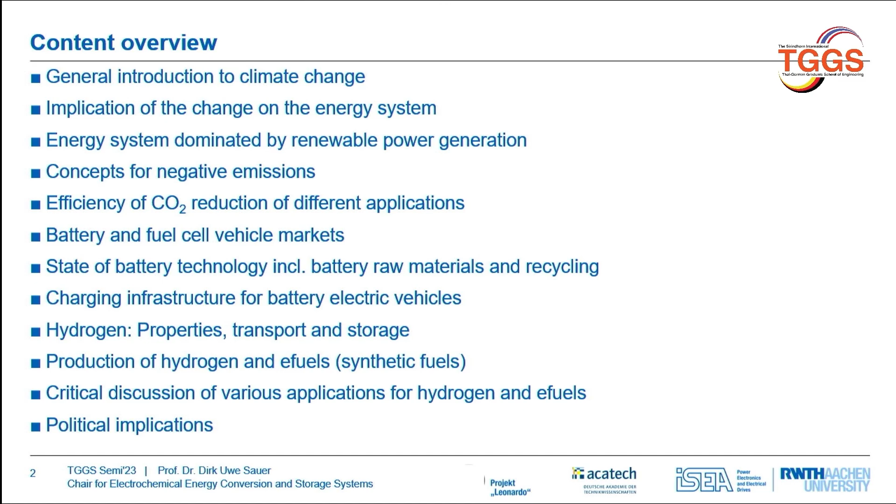So I would like to start with a short look into the general issues on climate change and the demand for lowering CO2 emissions, because this is for sure the driver for all of this. I would like to give you some insights into European and German strategies especially, and they are quite similar to the United States, though their approach is different.

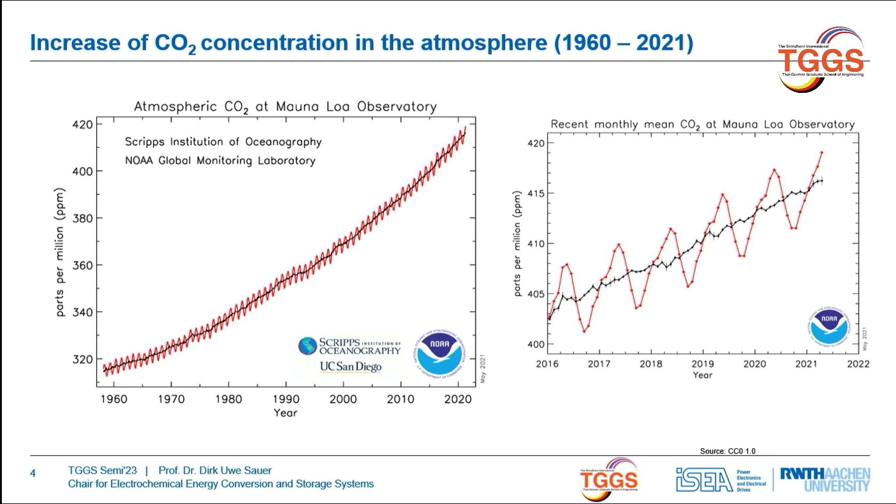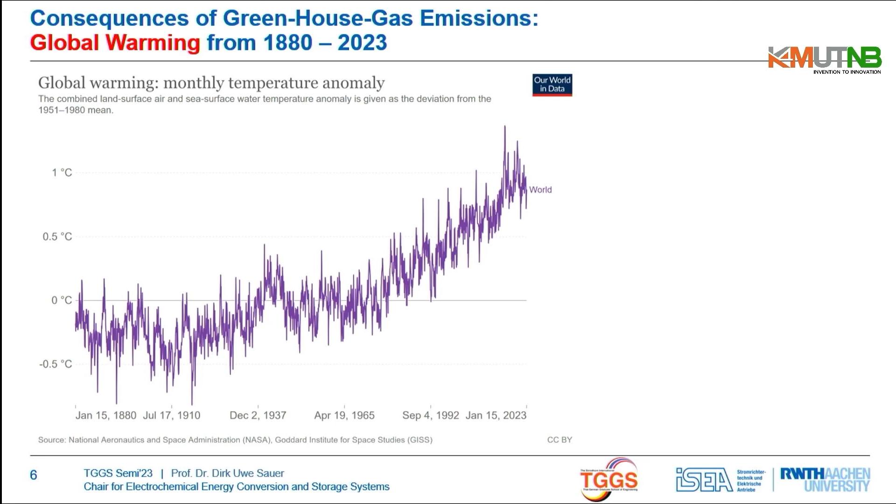Furthermore, if we look at what really happens from this, the temperature increases. We have meanwhile more than 1 degree Celsius above pre-industrialized times. It is meanwhile very clear for climate researchers that the 1.5 degree centigrade target, defined in the 2015 climate conference in Paris, cannot be met anymore. There is no way to meet the 1.5 degree target, at least not in the coming decades, maybe towards the end of the century if we go for negative emissions and more.

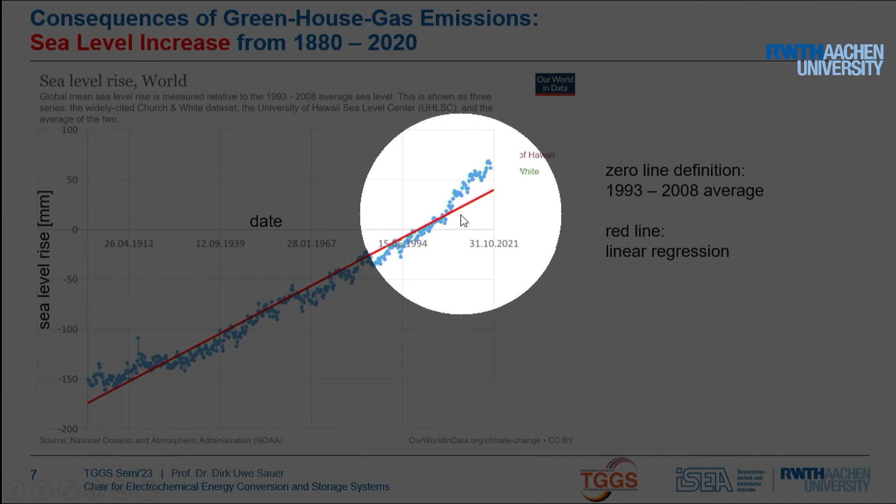But the temperature will rise, and one of the outcomes is, for example, an increase in sea level. Within the last 150 to 200 years, the sea level rose about 25 centimeters worldwide. But what is especially important is that the rate of rise increases quite significantly.

So the sea level rise accelerates. This is just one of the outcomes. All the other things: more floods around the world, more storms, less ice, and so on. This is just how it looks like.

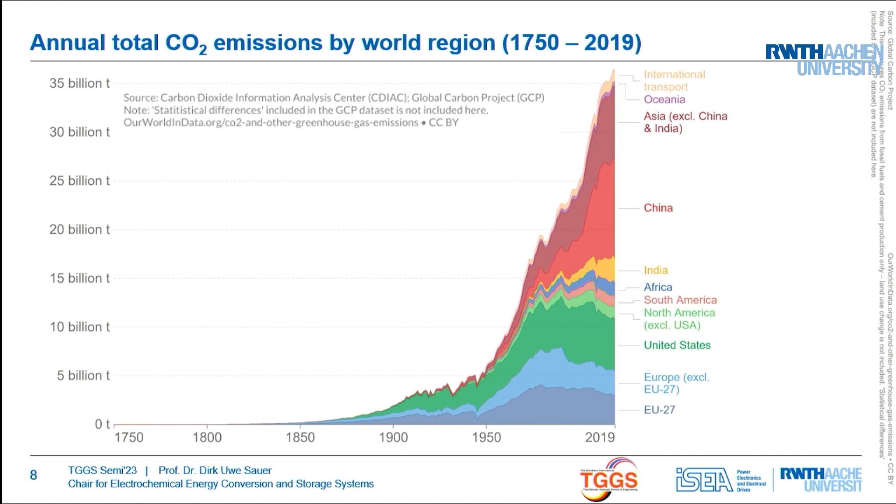Since 1990 we have had world climate conferences, but CO2 emissions still significantly increase on a worldwide level. We are probably not even at the peak right now. We hope that the peak appears before 2030, but the problems are very clear and severe, so lots of things need to be done. Some areas in the world, such as Africa or maybe even India, have just started to grow their economies significantly. If we cannot manage to transfer them right away onto a CO2-free energy supply, we'll get into even more trouble.

When we look at how these emissions are distributed worldwide, we can see that this is very unevenly distributed. We have extremely high emissions here, especially Australia and North America per capita. Europe is also among the very high emitting countries, but meanwhile the emissions per capita in China are pretty much the same as in Germany: 7.5 tons per capita of CO2 emissions in China as well as in Germany. So this has leveled in the last years, almost.

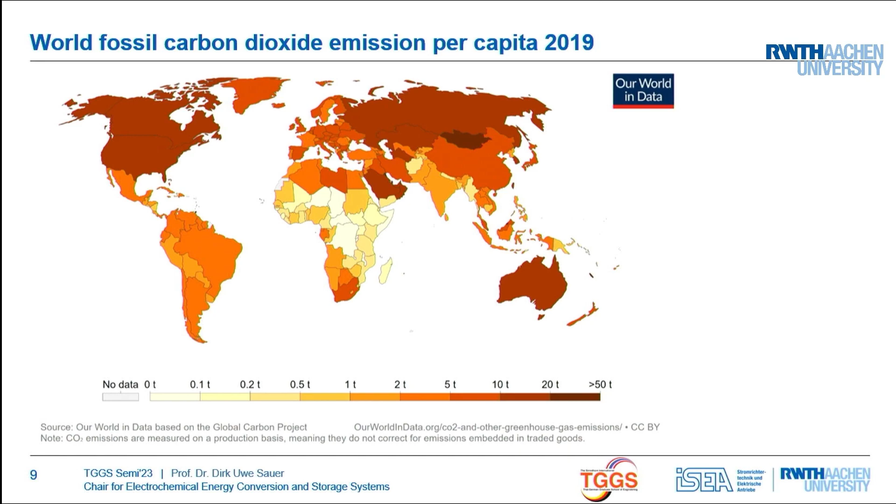So then when looking at where these emissions come from, we can have a look into the different fuels. We use different fossil fuels, and different fossil fuels have different specific CO2 emissions, no question. This is one of the reasons why many put lots of emphasis on increasing the share of natural gas. Natural gas was planned to be the technology for the transition from the old fossil economy to the future renewable-based economy.

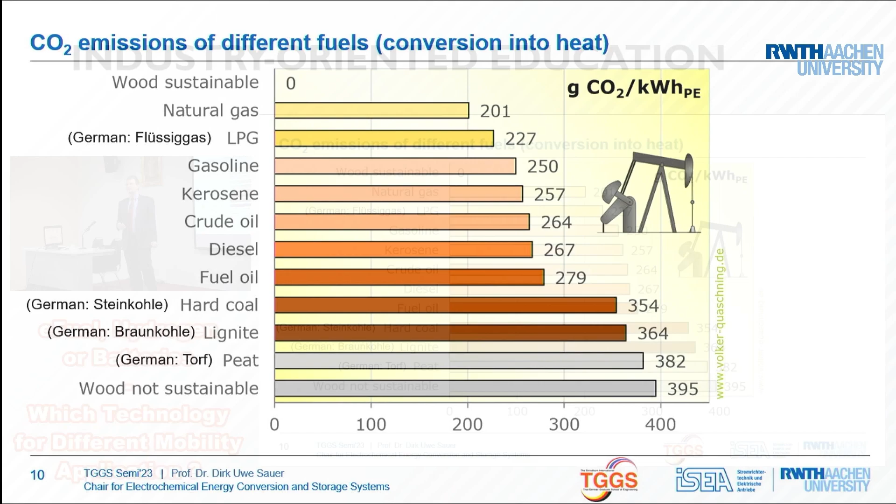But especially in Europe, we suffered a lot with regard to gas. As you all know, since tomorrow it's been a year since this war of Russia in Ukraine started. As a consequence, the European Union mainly stopped the imports of fossil fuels from Russia, and especially Germany was very much dependent on this. We imported more than 50% of our natural gas via pipelines at very low prices, we have to say, from Russia in the past. This is now over. We also do not import oil or coal anymore from Russia, and this all needs to be substituted.

This is for sure one of the main reasons why gas prices, and therefore energy prices in general, increased so much last year, because Europe bought a lot of additional LNG gas on the world markets, and by this the prices rose dramatically. Meanwhile, we're quite optimistic that we will get through the winter without major problems with gas supply, but next year will be as challenging as this year.

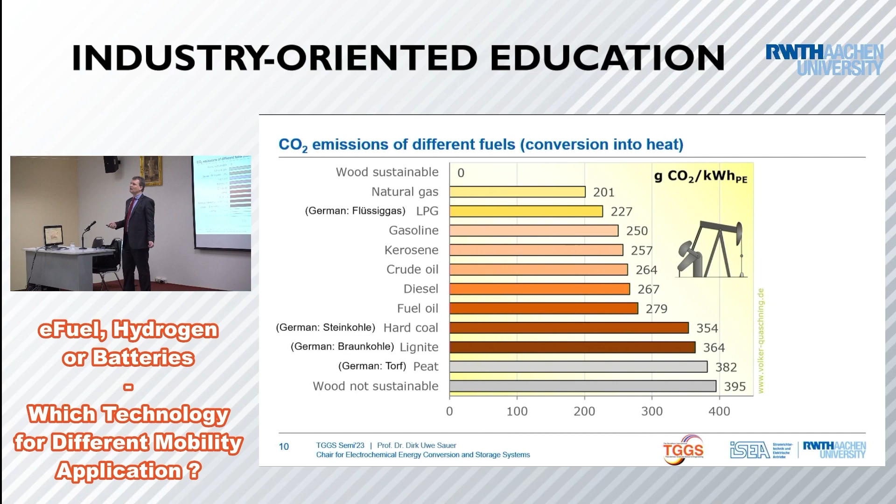Therefore, the increase in natural gas consumption as an intermediate technology is now very questionable because of the high prices. On the other hand, coal especially emits 70 to 80% more CO2 per kilowatt hour of thermal energy, and therefore gas is still a good idea, but if it's not available or very expensive, we have to look for alternatives.

One more point I would like to show here is that the question of what really contributes to climate change is very complex. This is just an example, from air travel.

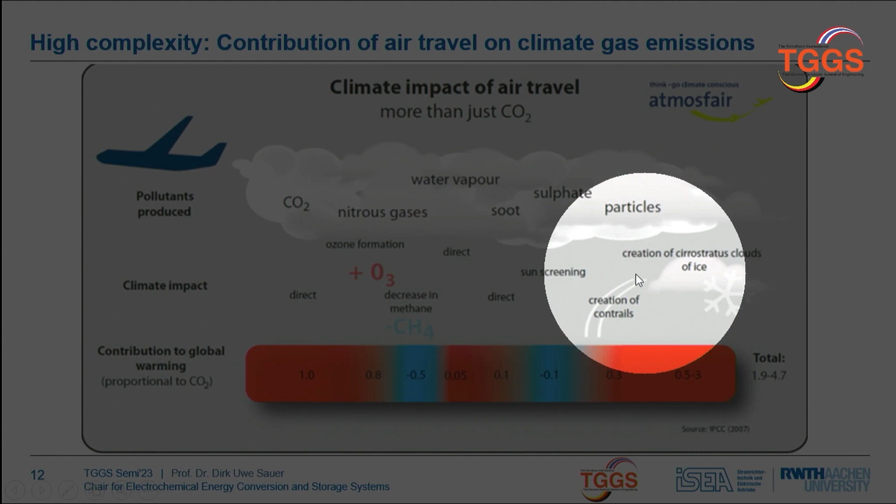Airplanes for sure emit CO2, no question. A flight from Frankfurt to Bangkok roughly emits 1 ton of CO2 per passenger. But this is not all that contributes to global warming. We have nitrous gases, water vapor, soot, sulfate particles, and many of them have additional global warming potential, while some reduce it to a certain extent. Depending on the studies you're following, the total global warming potential, with CO2 taken as 1, is somewhere between 1.9 and 4.7.

Especially water vapor is a very critical thing here. Reducing the CO2 emissions of an airplane maybe even to 0 by using, for example, biofuels or synthetic fuels, things we are talking about today, will not reduce the global warming potential of flying to 0. Because if you use hydrogen or any other fuel, it will still emit water vapor, for example. So this is not going away. The complexity of all these things is very high, and simple answers are not there.

But we have to be aware that besides what we typically have in mind, like passenger cars and power plants, the global transport sector has significant emissions, for example in shipping and aviation, about 1 gigaton per year each. Both contribute somehow like 3% each to world emissions. I'm putting emphasis on this because it is very clear that such airplanes will not fly from continent to continent on batteries, at least not within my lifetime.

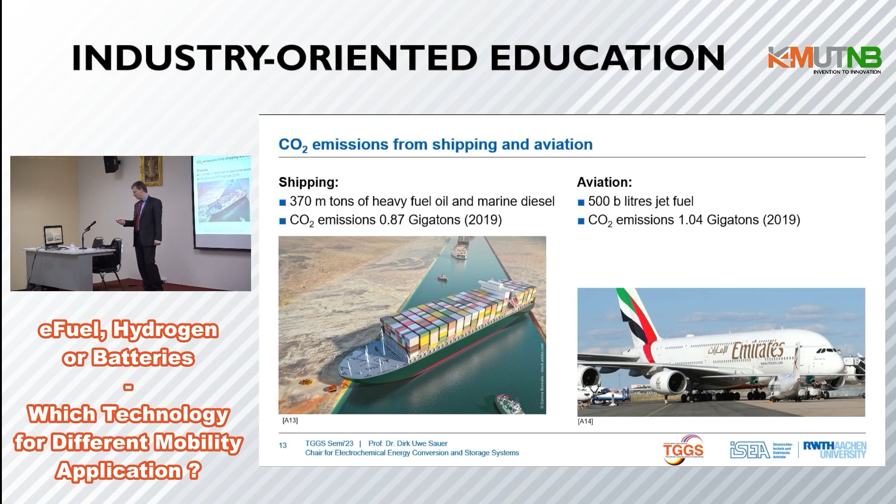Looking at the policies, we are all still following the last very important agreement from the World Climate Conference in Paris in 2015, where the 1.5 degree target was agreed on. But as I said, maybe already in 2015, but meanwhile definitely it is clear we cannot meet it. So we will go beyond 1.5 degrees C without any question. But nevertheless, based on this treaty, the European Union, for example, has set itself the goal to be CO2 neutral latest in 2050.

So it seems to be still a long time ahead, but it's just 27 years to go, so that's not a lot at all. And in Germany, also because our constitutional court pushed the politics to go even faster, we are planning for CO2 neutrality already in 2045. And especially until 2030, there should already be a reduction in CO2 emissions by 65% compared with 1990. And this is extremely challenging.

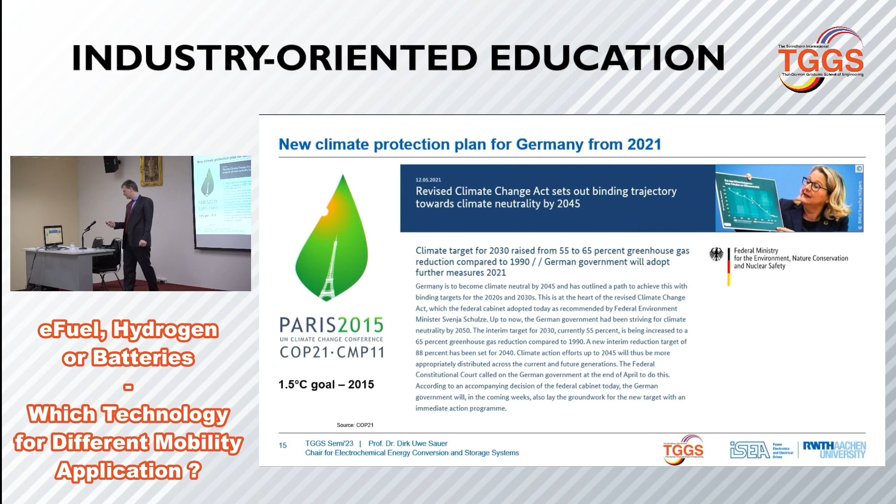And how challenging it is, you may see from this timeline. These are the CO2 emissions from Germany, starting in 1990. You can see there are reductions in emissions, and they are uneven across the different sectors. The largest contribution comes from the energy sector, because we have meanwhile almost 50% renewables there. But in the mobility sector, for example, and I will come back to this some more times, we have no progress at all, no savings in the mobility sector yet.

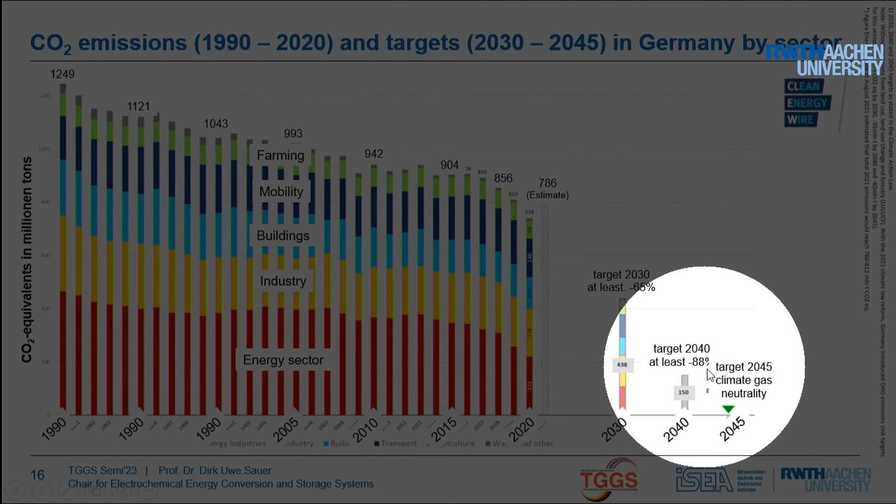But what really becomes challenging, you can see here, these are the targets: 2030, minus 65%; 2040, minus 88%; and then 2045, climate neutral, or CO2 neutrality. What this means, neutrality, I'll come back to in a minute. The challenge, for me, the biggest challenge, is not the targets in 2040 or 2045. The biggest challenge is 2030, because the time until 2030 is getting extremely short.

And we again lost more or less the last year, because our politics were very much busy solving short-term energy problems, which we faced due to this Russian war in Ukraine, and therefore time is running. So this is the most challenging thing.

We also have to be clear that even these ambitious timelines are not sufficient to meet the 1.5 degree target, and probably not sufficient to meet the 2 degree C target either, even if the whole world would follow us on this timeline.

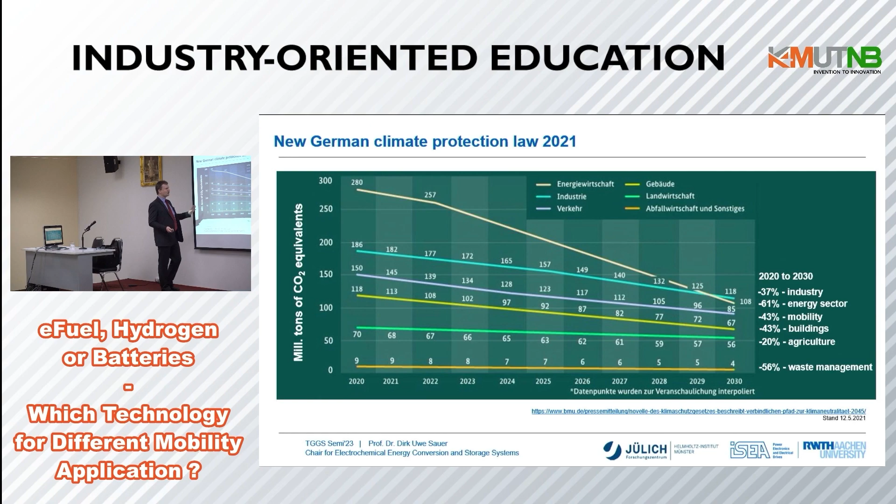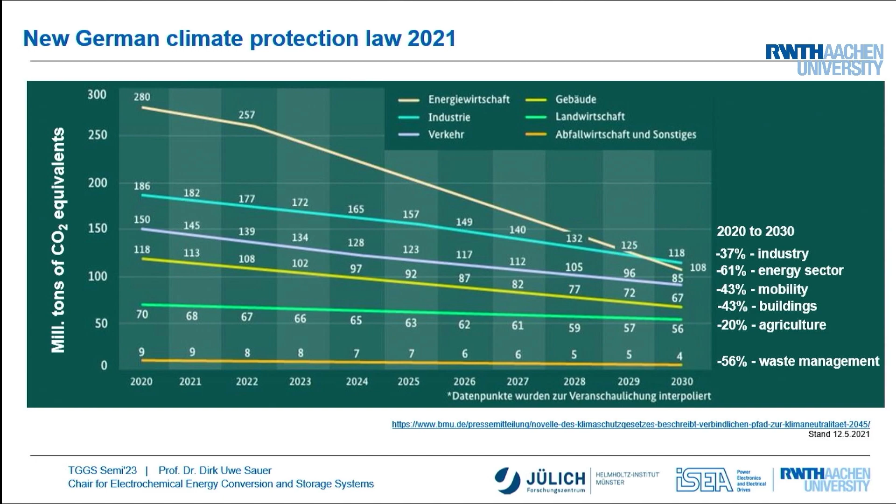It's becoming even more clear how challenging these targets are if we look to different sectors, because then it becomes more clear what it means in detail. This is the basis for our actual Climate Protection Act. From 2020 to 2030, industry should save about 37% of CO2 emissions, the energy sector more than 60%, mobility and buildings about 40%, and agriculture 20%. These are significant changes on a very short time scale.

To achieve this, the government, which came into power about 1.5 years ago, put some actions on their action plan.

The first one is to achieve electricity generation of 80% from renewables by 2030. In 2020/21 it was about 50%. So increasing this to 80%, while at the same time we expect an increase in electrical power demand.

In 2020, demand was about 545 terawatt hours, and now we expect, due to additional demand from the mobility sector, electric vehicles, heating with heat pumps, and hydrogen production, an increasing electricity demand towards 2030, and further increasing towards 2040-45, maybe to 1,000-1,100 terawatt hours. This makes it challenging in a double way.

It's not only increasing the share from 50 to 80%, but the share of 80% of a significantly increased amount of electricity. This requires a very strong initiative to increase investments in wind turbines and PV systems. Our Chancellor just said it would be necessary to build 4 to 5 new wind turbines every day in the future. This is definitely challenging.

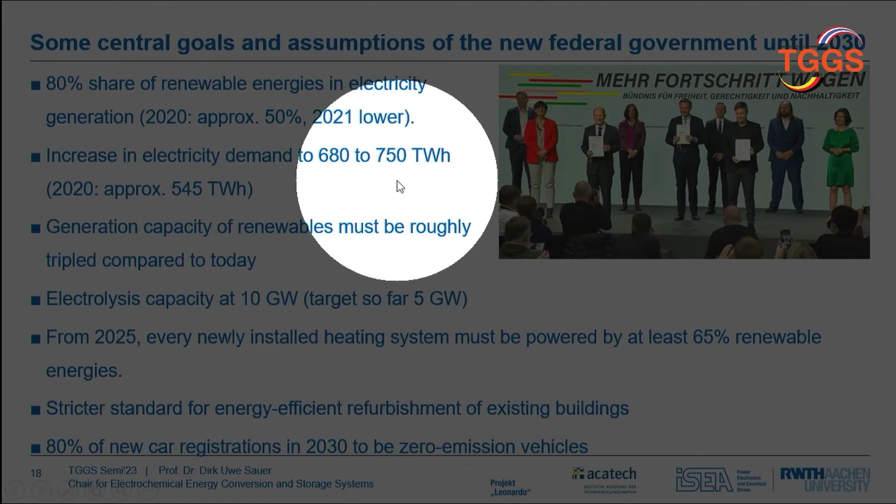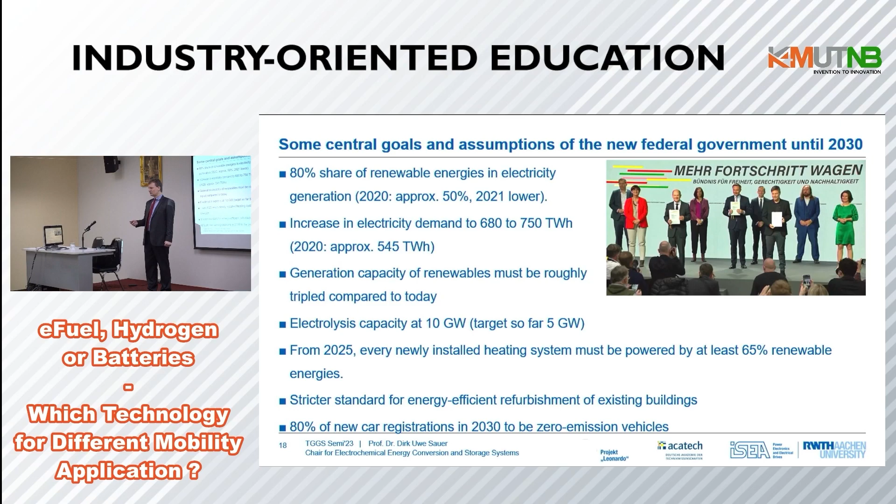By 2030, about 80% of all new cars should be zero-emission vehicles. Meanwhile, the European Union has defined a ban on all new combustion engine cars from 2035 onwards, so beyond 2035 you won't be able to sell any new combustion engine car on the European market. These are all things causing very fast changes in industries.

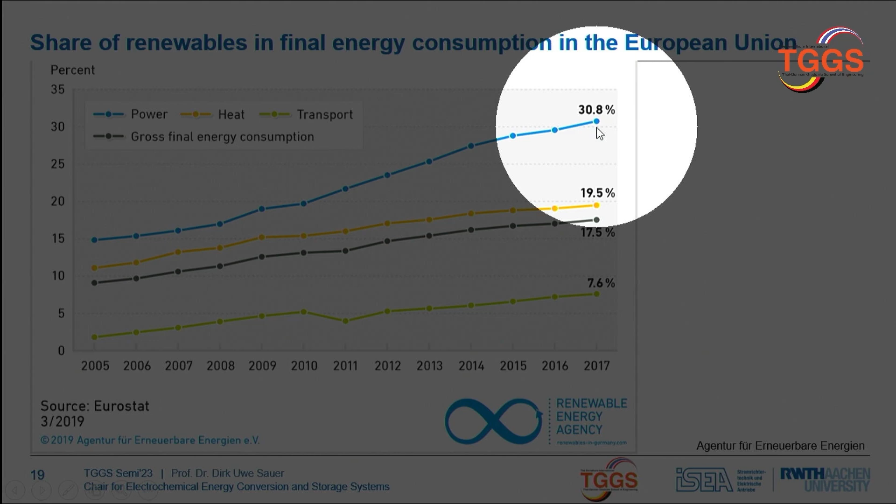If we look at the European Union in total, we can see this is still at the beginning of this major transition. The power sector in total has a renewable share of about 30% of the market, increased further since 2017, but still not too high. The electricity sector, like in Germany, is doing quite well with renewables, but other sectors like heat and transport are significantly lower and need much more change in coming years.

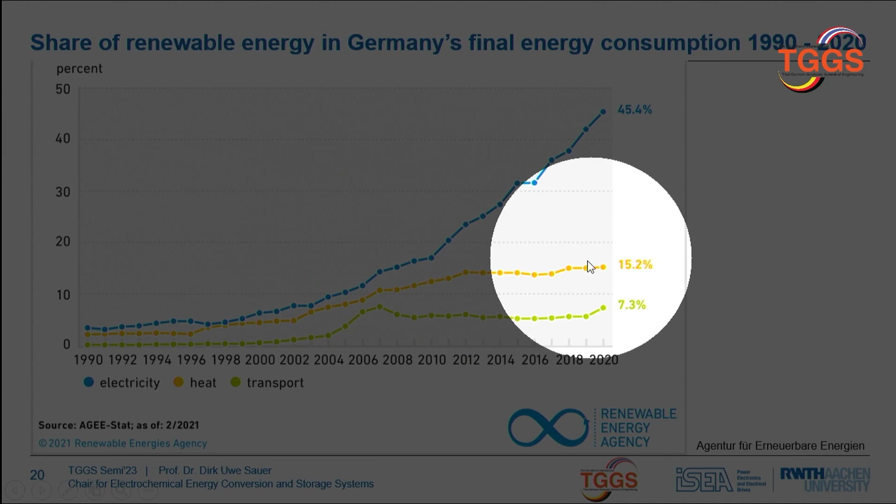These are the numbers for Germany: 45-50% in power generation, but only 7% in the transport sector and about 15% in the heat sector. The heat sector in Germany is the largest energy consuming sector because we have cold winters, so we have to do lots of heating. We lose less to air conditioning in summer, but heating is really a major concern. At this point, heating of houses takes place with more than 80% from oil or gas, direct burning in the houses, and this is most challenging here.

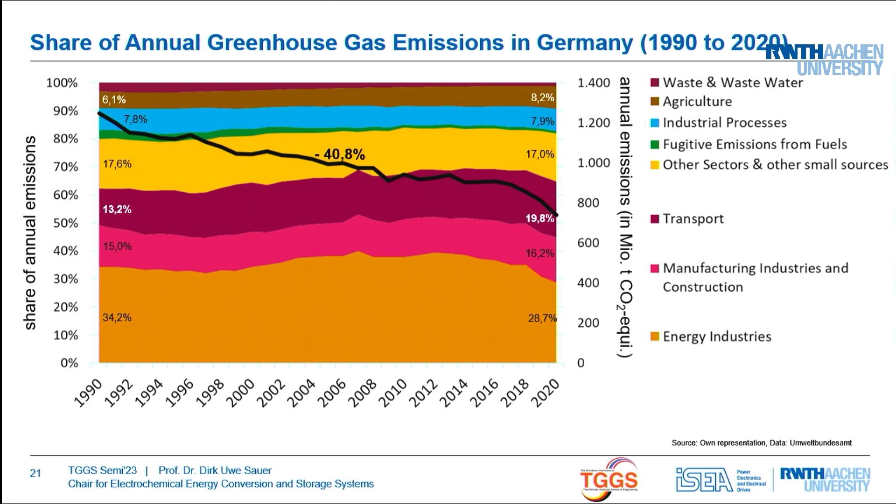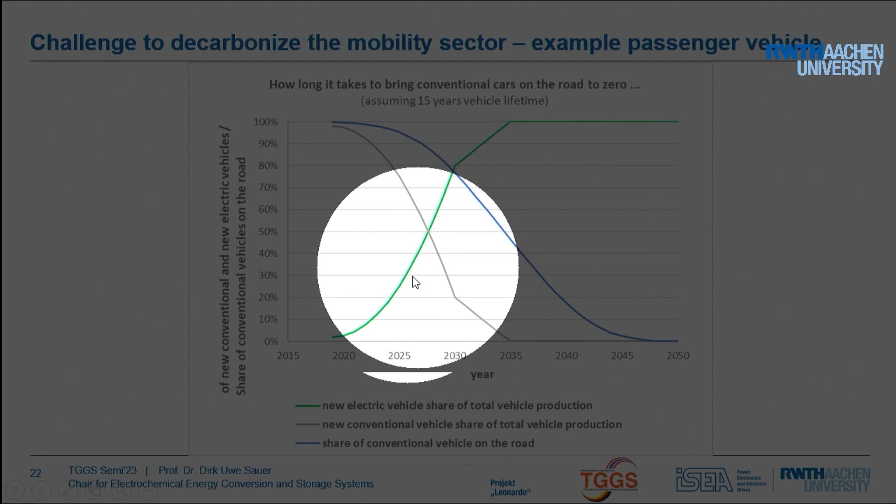To show additionally how difficult it will be to achieve these CO2 reduction targets, I made this very simple calculation. It assumes the share of newly sold passenger cars increases from a relatively small market penetration now to 80% in 2030, and latest by 2035 to 100% - this is the green curve - the share of newly sold cars which are emission-free, most probably mainly battery electric vehicles, could also be fuel cell cars, not very likely but possible.

But even then, if you look at the blue curve, this is still the stock of remaining passenger cars with combustion engines, as long as we are not taking them out of the market, taking into account a 15 year life period. So you can see that even if we achieve 80% new cars in 2030 and 100% in 2035, in 2045, when we want to achieve zero emissions, there are still conventional cars on the roads. And either you take them out of the market—probably then the government has to pay money to people because you're taking cars which are not at the end of their lifetime—or gasoline must be extremely expensive so that people more or less on their own would reject these cars. But the timescales are long, and every year, every day we lose in staying with these target lines, we will have more problems towards 2040 or 2045.

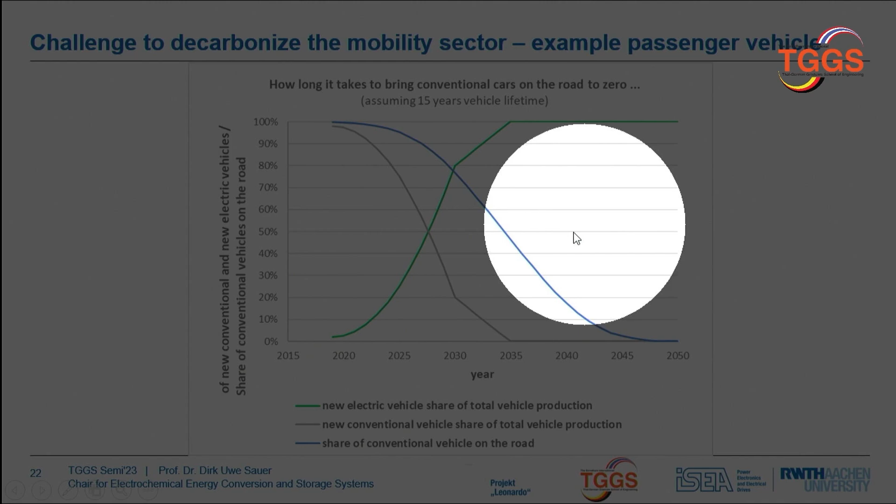We will have more problems towards 2040 or 2045. Thank you.

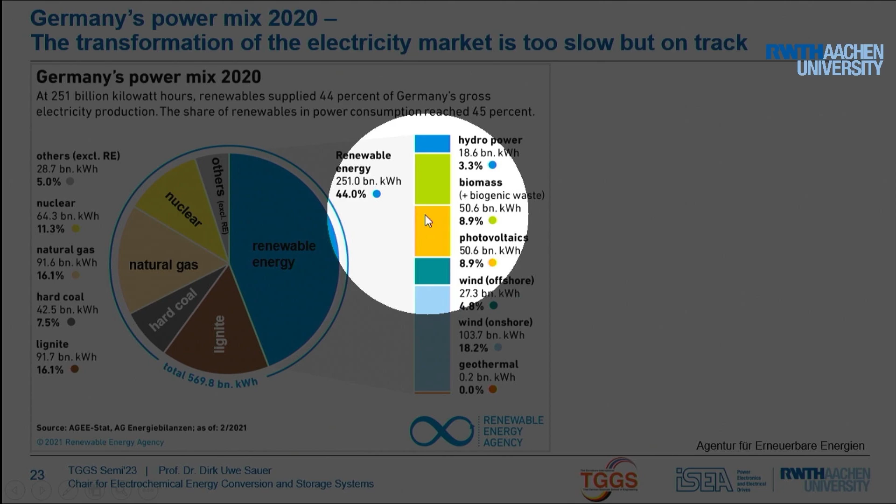You can see that the majority still comes from wind. The light blue is onshore wind turbines, the green here is offshore wind, and then we have photovoltaics and biomass. Biomass and photovoltaics for the first time were leveling in 2020. Biomass is slightly reducing, maybe more heavily reducing in the future, whereas photovoltaics is growing relatively fast.

Generally we expect the growth in photovoltaics will be larger than the growth in wind, but both are important. For the German energy system, the combination of wind and PV is important because sun is good in summertime, and wind especially is much stronger in autumn and wintertime. So we can compensate for lower solar radiation in the winter half of the year with better wind conditions—both together give a relatively good power supply throughout the year. Just putting everything on wind or on PV would cause lots of problems, because then we'd have to store lots of energy from winter to summer or summer to winter.

And these are now the targets for installation, set by the government. For sure these are just targets, because in a political system like ours, the government itself is not installing anything—they can just try to optimize the legal frameworks and maybe give some subsidies. But at the end of the day, these systems need to be built by companies.

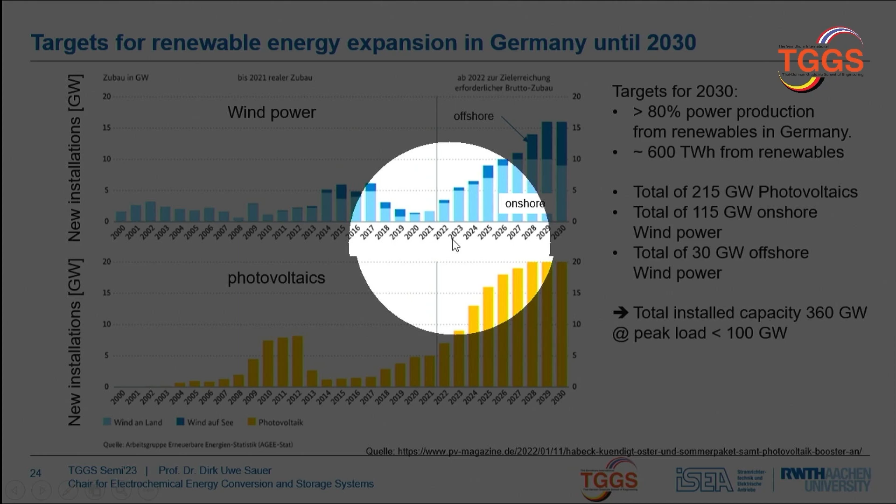You can see that latest in 2028, something like 20 gigawatts of photovoltaics should be installed year by year, plus another 15 gigawatts of wind, ramping up from quite low starting points in 2021, 2022. This is the main challenge—not only to build up or grow the industry, or to buy these things. At the moment we buy most of our photovoltaics from the Chinese market, but it's especially a problem with availability of craftsmen and sites.

It takes many years typically to develop new sites to set this up, and this is especially where our government is targeting—each city, each village should define at least 2% of their land area for renewables, to make sure we have sufficient area for this.

If all of this were installed, we would come up with a capacity in 2030 already of about 360 gigawatts of installed renewable capacity. This is worth mentioning because at the moment our peak electrical load is at 80 gigawatts. So this means in many times of the year we will have very significant surplus power generation, and this gives us room to take that surplus energy to produce hydrogen, and then in a second step e-fuels or methane or whatever.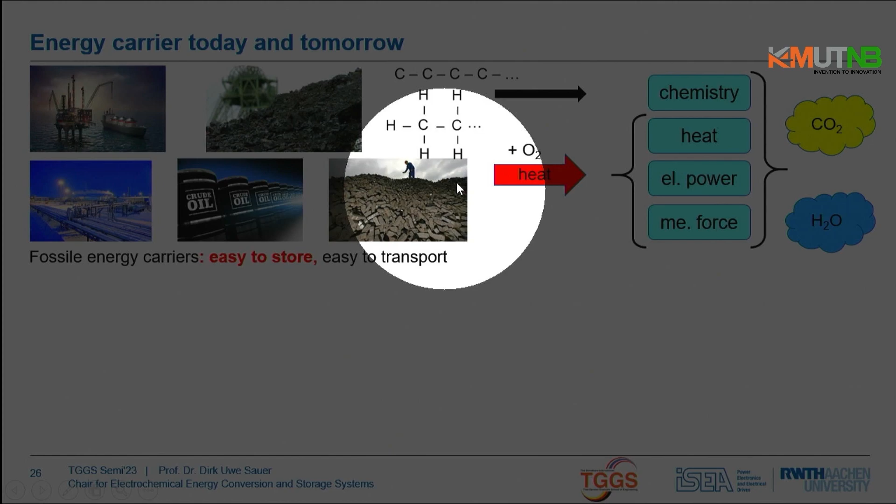Just to remind us what this really means: the change we're undergoing is that until now we're using fossil fuels, which are at the same time perfect energy storages, and the vast majority of this we simply burn. We take the oxygen from the atmosphere and burn it to make heat - heat in a combustion engine, heat in a heating system, or heat in a power plant to produce steam, or to operate a gas turbine and steam turbines. This is what we typically do. Which is quite a pity, because heat has the lowest value among the different energy carriers we have. But this is how more or less all our systems work today.

What comes is that our main source will be electricity, mainly from wind and PV systems. Some people would add nuclear power technologies - this could be discussed - anyhow, they also produce electric power. And that's important: whereas before heat is what we put into most of our processes, now it's electricity. Electricity has the highest value, because with electricity you can do everything at very high efficiency. You can drive electric motors with more than 90% efficiency. You can put it into heat pumps to generate heat with efficiencies of 300, 400, 500%. You can use it for communication, or transfer it to heat just by ohmic resistance at 100%. So electric power is extremely flexible, and this means once we have electric power, we should look carefully at which applications we can shift directly to the use of electricity.

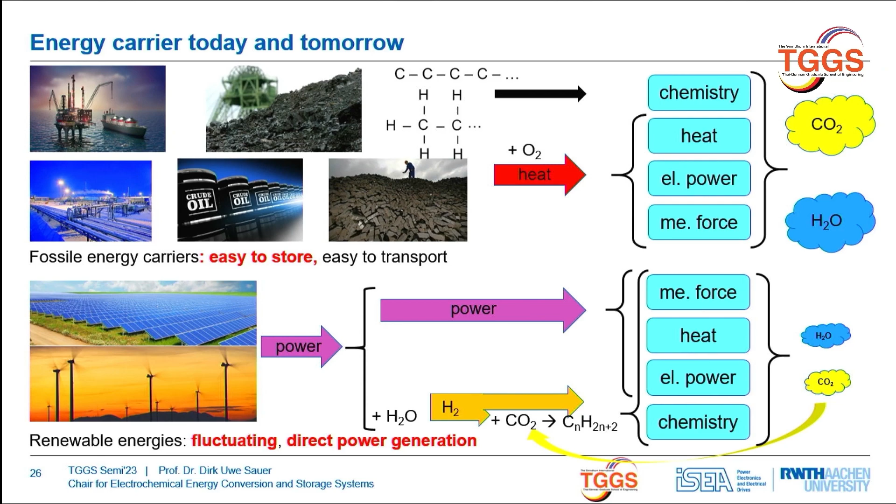But it will be absolutely necessary, and the big fight at the moment is not about the question of whether we need hydrogen, do we need e-fuels - yes, we do. The question is which sector may get some. For example, the steel industry would need huge amounts of hydrogen to convert the processes for producing steel from today's very CO2 emitting processes towards green steel. So if you want to build such new steel factories, you would need right from the beginning huge amounts of hydrogen. And the energy sector becomes more complex.

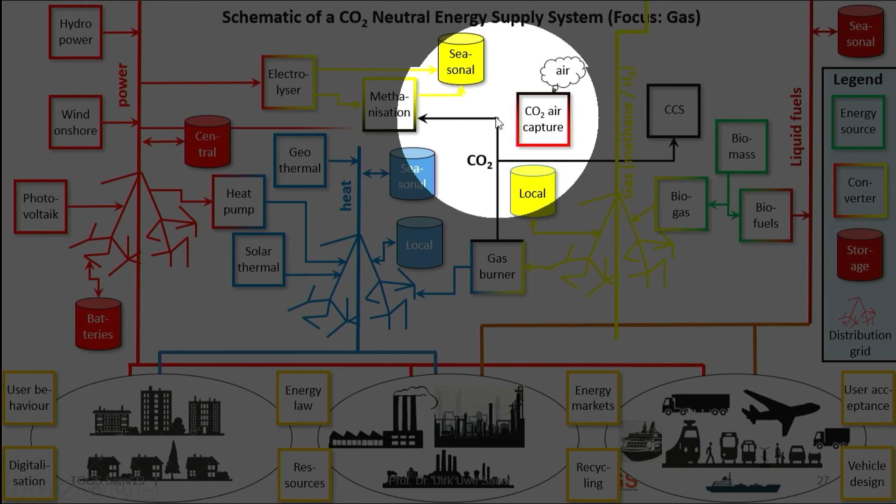So whereas in the past we had quite separated energy sectors for electricity, for gas, for heat, for fuels, and so on, we're now getting a very much interlinked system. We have power generation mainly on the side of electrical power, and from this energy goes into the heat sector, but it also goes via electrolysis into methanization, hydrogen. We have seasonal storage in gas most probably, and from the seasonal storages, we can produce electricity during winter times.

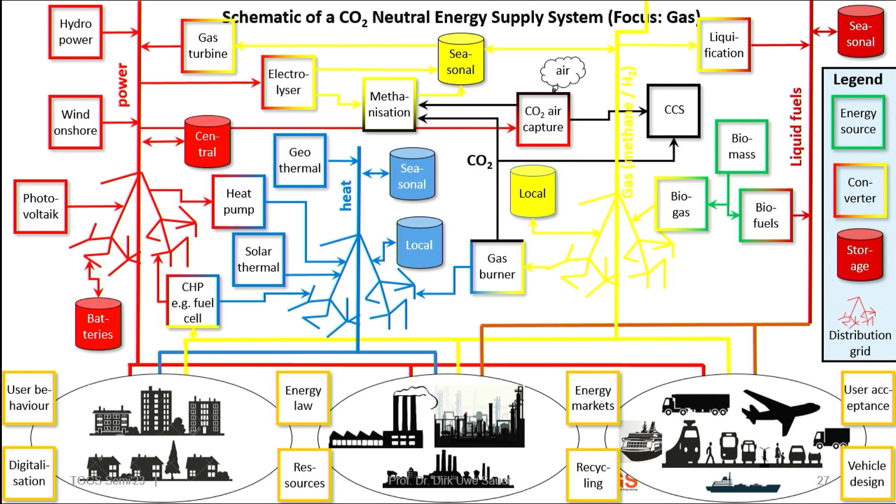All this is extremely interlinked, and this also makes this transition extremely complex, because there are very few engineers and people from economy who are familiar with all of these sectors at a time. But you must be able to think in all of these things, because one of the questions is, if there is a surplus of electrical power generation, for example, where to store it?

Will we store it directly in some electrical storage systems like batteries or pumped hydro, or will we transfer it directly to the heat sector, because maybe we need heat or cold in the winter or in the summer? Or do we produce gases and put it into the gas sector, or do we produce fuels? So all of these things are of relevance, and in addition, all of these systems are limited also by their infrastructures, by their grids. So which infrastructure should be enhanced in the future, which might be not that relevant anymore?

For example, as I said, at this point in time, we are heating about 50% of our houses with gas. This means we have a very elaborated gas distribution system where 50% of the houses are connected to a gas distribution grid. It is quite likely, from the view of this point of time, that this gas system will not be needed anymore in the future, which is a big problem for those who have invested. It's maybe stranded investment, but especially also the question, where do we invest right now?

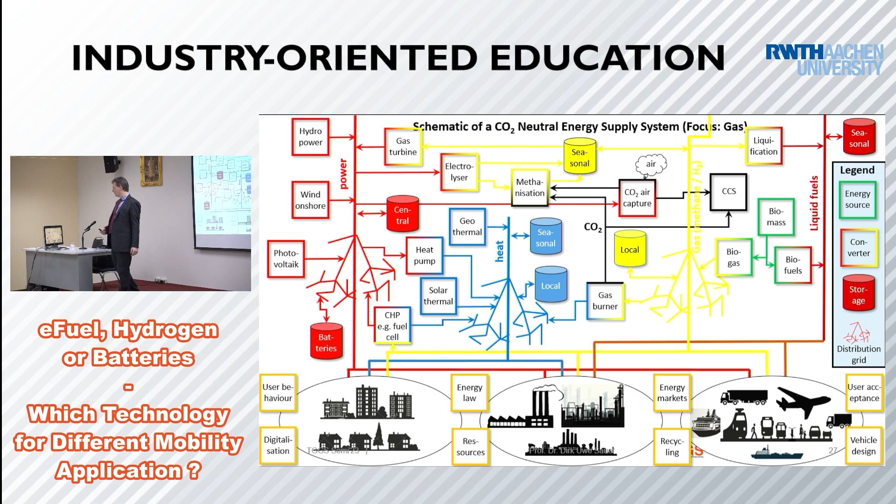So all the things have timelines of decades. So if you install an infrastructure, you would like to operate it for 30, 40, 50 years, and not only for very short times. And all this comes together with questions about digitalization, energy law, resources. So will we be limited in some of the new technologies by mining resources, for example, is one of the key questions. But also the future energy system will still rely on a worldwide trading of energy carriers.

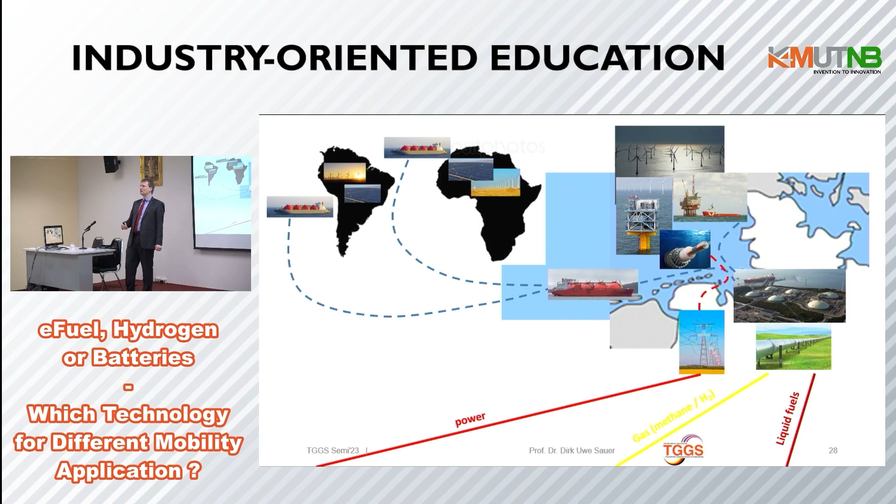Densely populated countries, especially more in the north, like Germany, like France, like Great Britain, most probably will not produce the energy they need in the future on their own area. So we will need to import either electricity via transmission lines, maybe from the southern part of Europe, gases, either by ship or by pipelines, or we will use fuels and hydrogen coming from somewhere, maybe from more sunny regions in the world, like Africa or Australia or wherever.

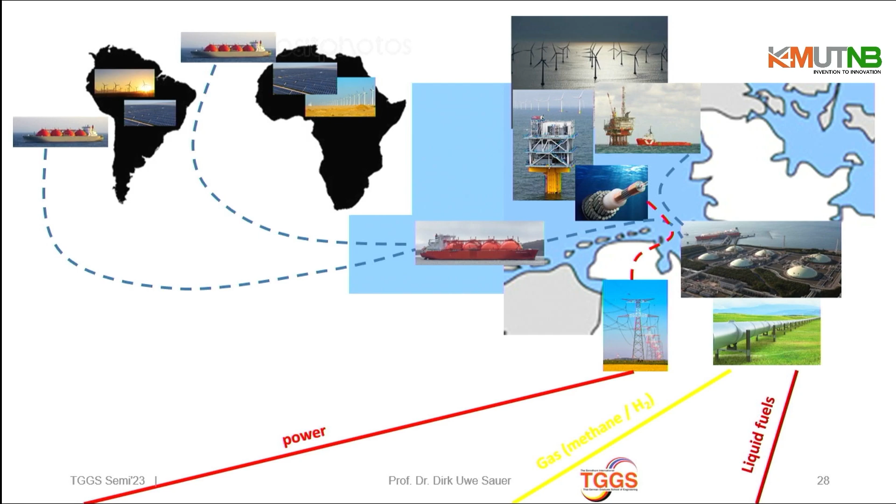These are new opportunities for those who can offer these energy carriers, but it also requires new infrastructures, new types of ships, new types of harbors, but also all the legal frameworks are not there yet. So there are no international legal frameworks, for example, for hydrogen ships and for harbors where you may bring hydrogen to.

So therefore, there are several very important areas of application in which hydrogen and its derivatives are really indispensable from today's perspective. For example, if we have wind and sun fluctuating seasonally, we need long-term storage. And this will be gas. Gas coming from hydrogen first, maybe then methane. We will remain an importing country, and probably most of the more industrialized countries will be. So we need transportability of energy over long distances.

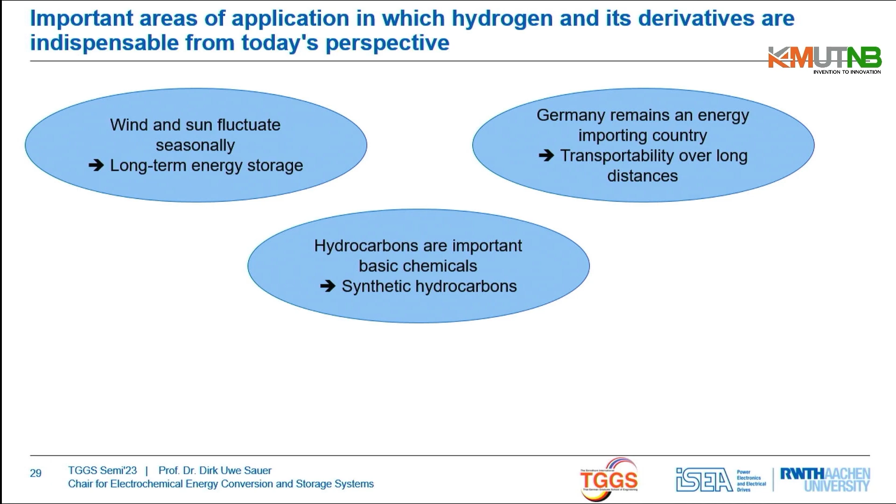We need hydrocarbons as a basis for the chemical industry. So we need synthetic hydrocarbons. The transport demand over long distances remains, probably with synthetic fuels. Not easy to transport hydrogen directly, also something we will discuss further this day. And we also will need high temperature heat, for example. Low temperature heat is easy to make with heat pumps; high temperature heat in the range of 1,000 degrees centigrade or more for some industrial processes is more difficult. And here we need, again, replacements for gas and oil based on some type of fuels.

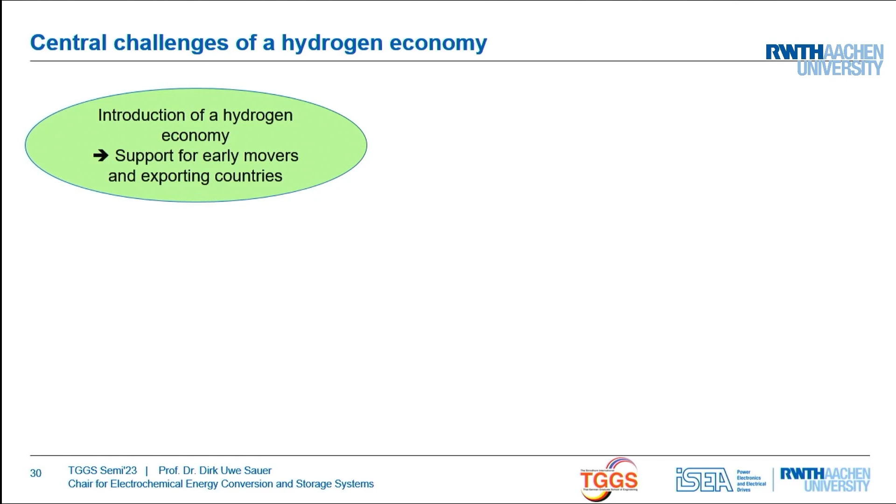And at the same point of time, building up such a hydrogen-based economy poses a lot of challenges. So the first question is how can we support first movers? Right now, one of the biggest problems is all the technologies, the renewable power generation, but also electrolyzers and the technologies to produce from hydrogen then fuels, methane, and so on, are still expensive, and they will show decreasing cost. But this means the ones who invest today pay more for their production facilities than those who will invest tomorrow or the year after, and so on.

And therefore, just from an economic perspective, there is no perfect time to do investments. Because you have the perfect market, and if somebody can produce cheaper, he simply will take the market. That's a big difficulty. So the question is, how can we support these early movers so that their investments will not be stranded if in 5 years somebody is producing the same hydrogen at half of the price, maybe.

The transport options for hydrogen and its derivatives are not yet developed in many areas. We don't have harbors which can ship liquid hydrogen or something like this. So this needs to be developed and costs a lot of time.

Then we have to face a lot of losses. We produce electricity first, but if we generate hydrogen and then maybe even further liquid fuels from this, so for replacement of oil, this costs a lot of efficiency. Therefore we have to analyze very carefully where we should take these losses into account and where it is more efficient to use this electricity maybe to save CO2 in a different place.

Let me give an example. Morocco, in the northern part of Africa, has a lot of sun, and a lot of people in Europe think Morocco would be a great country to produce, based on photovoltaics or also wind, because on the shorelines they have very good wind conditions, to produce hydrogen for the European economy. Not a bad idea, maybe even for Morocco a good business, no question. But the power supply in Morocco at this point in time relies more or less 100% on fossil fuels.

So if we produce electricity from wind and PV in Morocco, we would save much more CO2 emissions if we take this electricity and replace the existing coal, gas, and oil power plants, rather than going via a very low efficient way to use this same electricity to first produce hydrogen and maybe then some other hydrocarbons to burn later on in a passenger car. I will show you numbers on this in a minute. From an overall global climate perspective, it makes no sense.

So we should start to export hydrogen from renewables from Morocco once they have converted their fossil fuel power generation to renewable energies, not earlier than this. But business may drive different stories, while CO2 emissions are global.

At the end of the day, if we want to save the climate and reduce climate warming, we have to think globally and not about the emissions of a certain country. It would reduce Germany's emissions if we import Moroccan hydrogen, but the overall emissions would be reduced significantly more if this electricity in Morocco were used not for hydrogen, but for reducing their gas and oil power production.

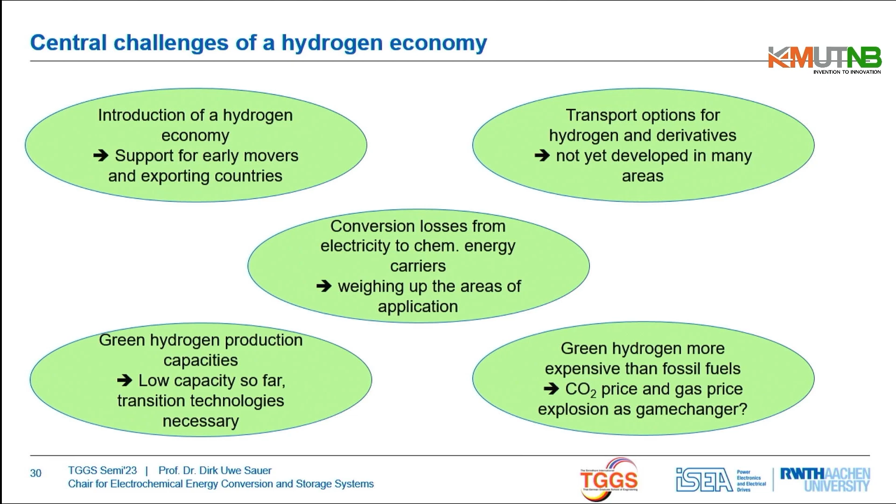Furthermore, green hydrogen is more expensive than fossil fuels. The question is, maybe the increasing gas prices are somewhat a game changer now. And the green hydrogen production capacities are still very low. I will also show you some numbers from the International Energy Agency on where we are today with electrolysis capacity and where we have to get to in the near future. So, lots of challenges, and that's what we are going to talk about here.

This brings us to the question of what it means to have an energy system which is dominated by renewable power generation.

This is how renewable power generation evolved from 1990 until 2020. You see the numbers we have seen before: wind power with the highest share, biomass and photovoltaics quite equal. Geothermal energy does not really play a role, and Germany has a very limited potential for hydropower, just about 3 to 4%, with not much potential to increase this. This is for sure different in other countries of the world, but this is as it is.

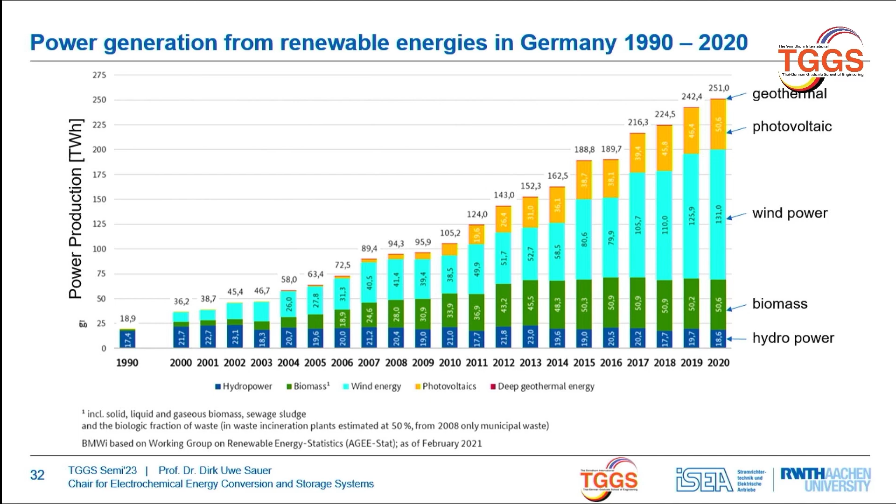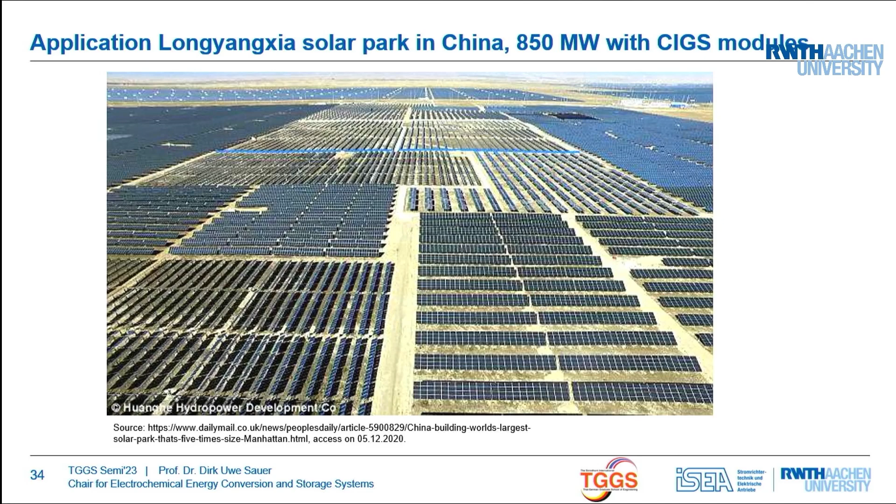Why does this happen? Simply, luckily, renewable power generation is meanwhile the cheapest way to produce electricity among all the alternatives—by far cheaper than gas, cheaper in most countries than coal, and by far cheaper than power production from new nuclear power plants. So this is good news.

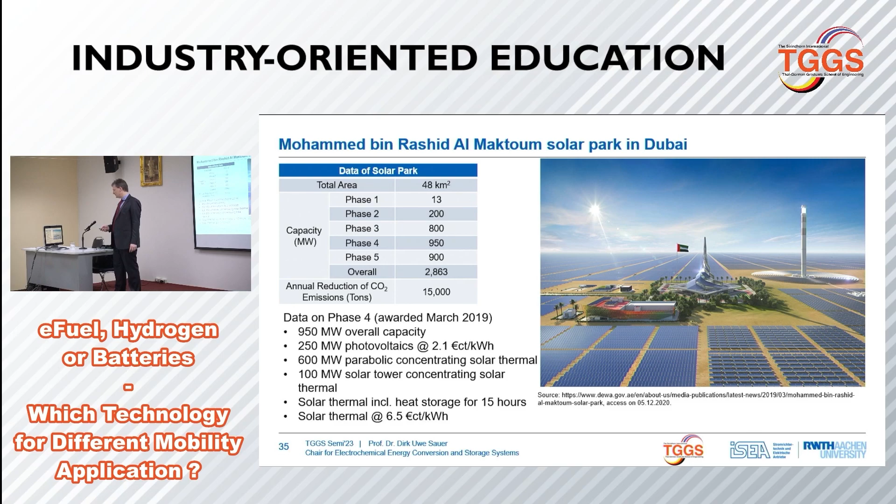This is more or less what we achieved in the last 20 to 30 years, developing new technologies which are now in place. Wherever decisions are really made based on pure economics, renewables are in the forefront, so we must not convince people anymore about the technology. This is mainly due, as I said, to the reduced prices, and we know there's an economy of scale depending on the overall amount of installed capacity.

The pity is the vast majority of production capacities are concentrated in China. That's not a problem on its own, but it's a pity that we do not have a more widespread technology all over the world, because we would need even more capacity than what we get today. That's maybe something which has to develop again in the near future.

This is important for all the discussions, because there are still a lot of people who always say renewables make our energy system expensive. And this is not the case. These are numbers from the German energy market, from the first part of 2020, January to mid-September.

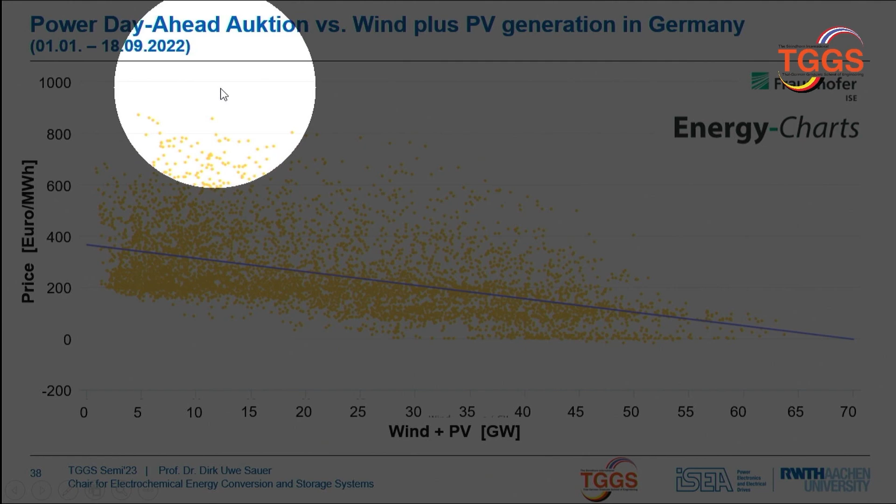Each of these yellow dots is a price from the German power exchange. Every hour, a price is set on the power exchange, and it is plotted versus the actual feed-in of renewables, wind and PV. For example, here we have 25 gigawatts of wind and PV fed into the grid.

We can clearly see that the price at the power exchange decreases with increasing share of power generation from renewables, and the trend line here is very clear. We are most expensive when we have to rely completely on fossil fuels, and with high penetration of renewables we are getting cheaper.

This is important, especially from a psychological point of view, because people have to understand: renewables is not the enemy of a cheap energy system. It's the friend of a cheap energy system, and more or less the only solution.

This is especially true in Europe because we've had a CO2 trading mechanism for maybe 15 years. For a long while it didn't really work because the price was very low, so it didn't have any impact. But in the last two years, many people have overlooked this - due to all the Russian politics, even before the war began, energy prices increased quite a bit.

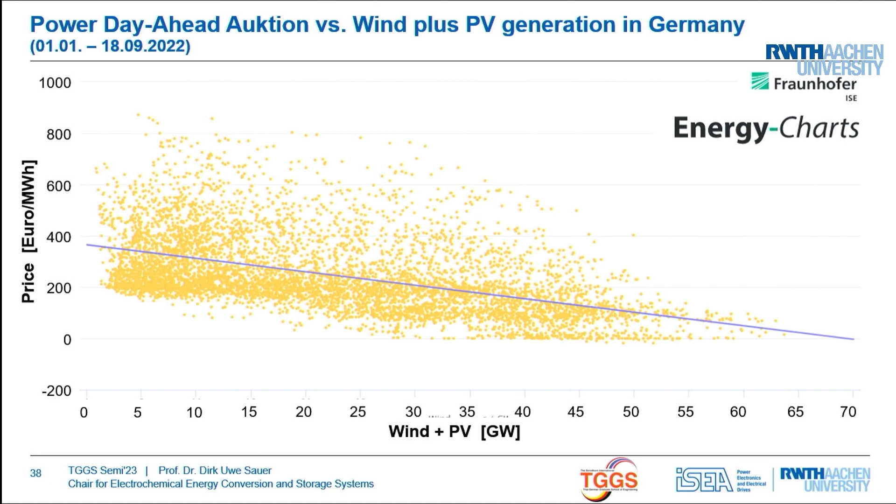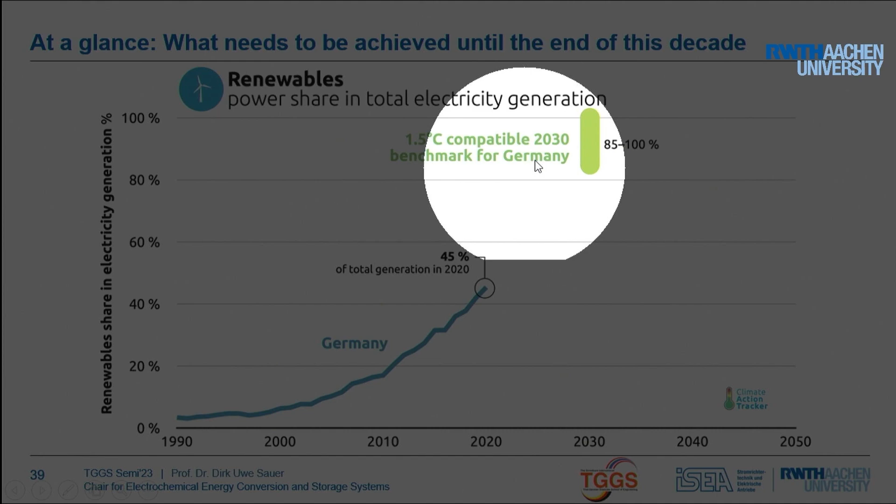But nevertheless, as I've mentioned, we still have to go significantly further to be compatible with the 1.5 degrees C target. And just to be clear, the capacities in renewables are not really limited, even though a country like Germany and others will still remain to import energy carriers in the future. We would be able to do it also in Germany.

I'd like to show you a very simple calculation about this, because we already use significant shares of our land for growing crops for bioenergy - as biofuels, 5 to 10% in our gasoline, and for power generation. In total we use about 2 million hectares of land in Germany continuously for growing crops for bioenergy, out of about 16 million hectares of land for farming.

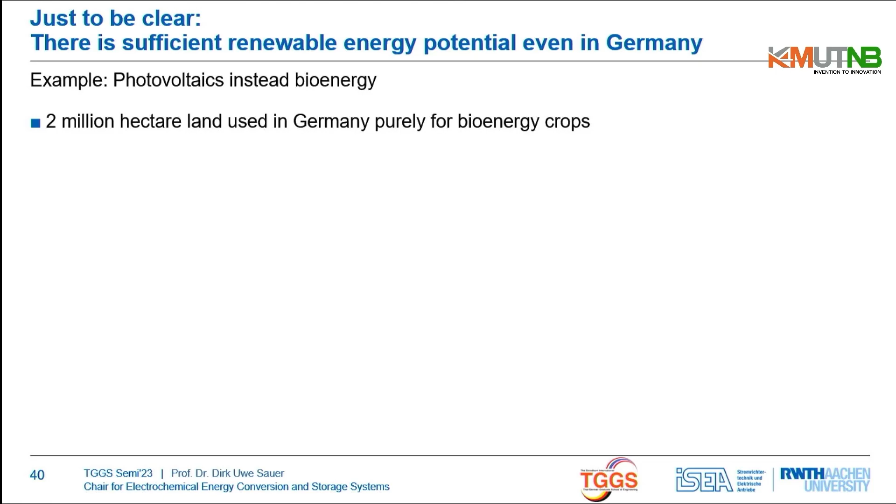Now, if you make some assumptions about the use factor of photovoltaics, the efficiency of PV systems including losses, and the solar radiation as we have it in Germany, we can calculate that if we converted this land - instead of growing crops for energy purposes, putting PV systems on the same land - we could easily produce more than 1,000 terawatt hours of electricity. Today we use 550 terawatt hours of electricity in Germany, so we could produce double on the same amount of land, and that's quite significant.

The main reason is the conversion factor of plants from solar radiation to energy is in the order of 1%. And PV does it with 20%. So from the same land, we can get 20 times more or even more energy.

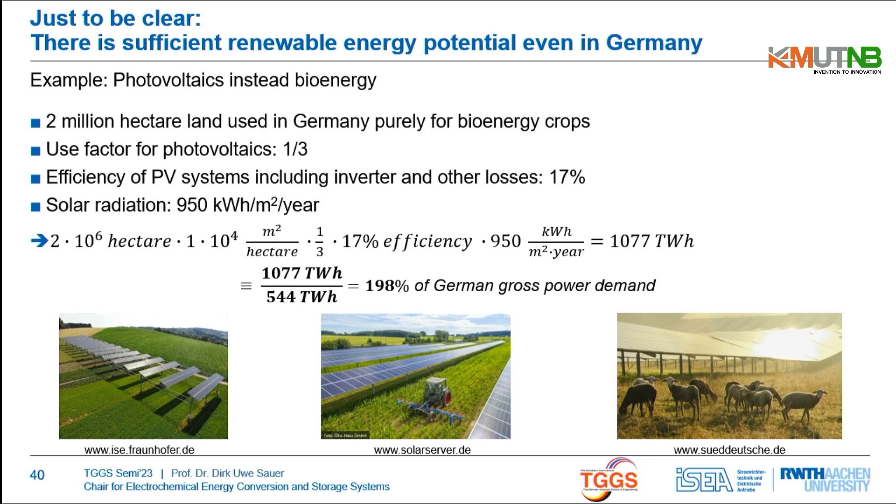And by the way, we also would do something good for the environment, because growing these crops needs a lot of fertilizers and pesticides and so on. And if we would grow PV instead, we could leave the land around relatively untouched, and it would be a good habitat for insects, birds and other animals. So it would be good for all of us as well.

But there are also ideas to combine both farming and PV. This is what they call agro-photovoltaics, putting the PV on small towers, maybe 4 or 5 meters high, so that you can still grow crops below this. Some crops even grow better if they get some more shadow. Some may have a reduction in production of maybe 10 to 20% due to the shadowing, but this is also an option.

So I just want to show with this, we are not suffering from area. We're not having a problem with land. We just have to do it, at the end of the day.

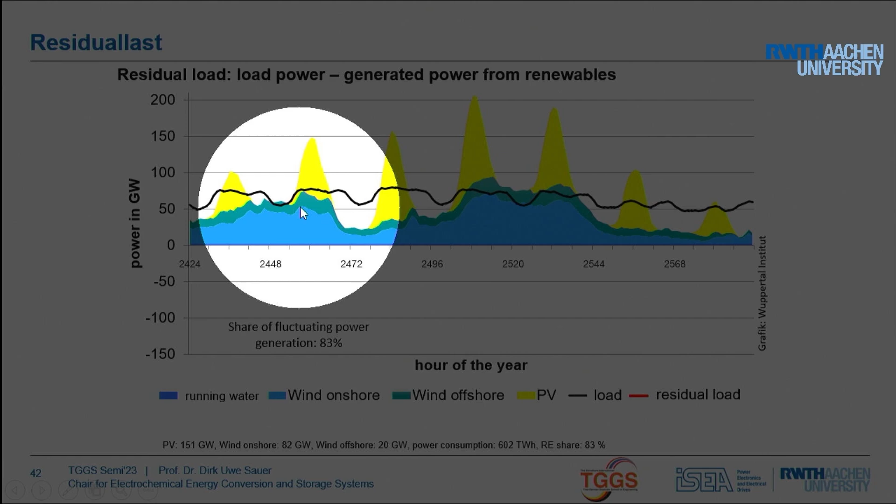Assuming that it is more or less the same as today, about 80 gigawatt in peak. You can see here the day times and the night times, and you can see Saturday and Sunday with a somewhat reduced power demand.

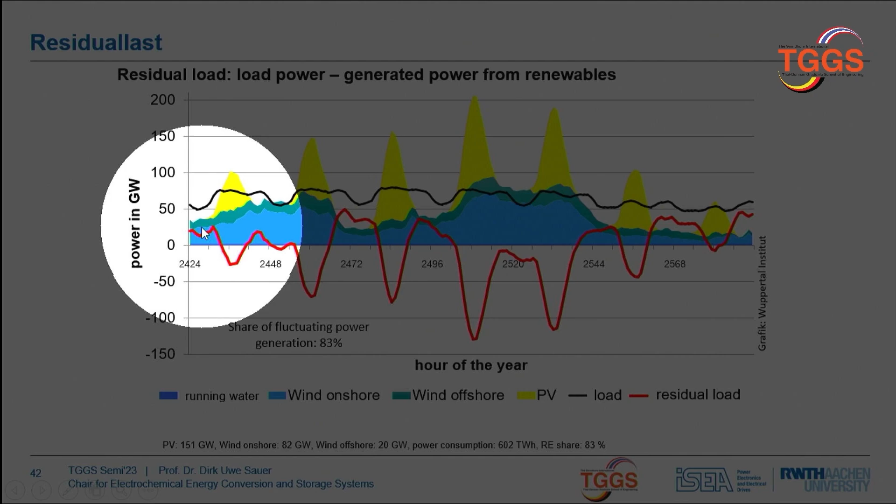And from this we get what we call the residual load curve. The residual load curve is the load, shown here as the black curve, minus the power generation from renewables. This means whenever the residual load is positive, we are lacking power generation.

So we have to add power from storage systems, for example, or we have to reduce the power consumption, with more flexibility, for example reducing charging of electric vehicles, or use in industry, or whatever.

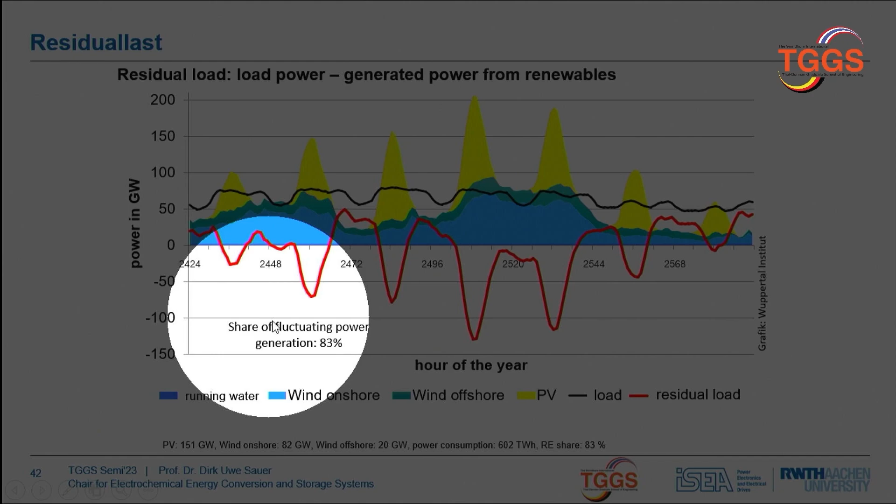And whenever we have negative residual load, it means we have surplus energy. So this is what we can put into storage systems, what we can put into hydrogen production, and then furthermore into fuels and so on.

So negative residual loads are easy to handle, this is not really a challenge. Positive residual loads are a challenge, because if we cannot manage to balance the loads and the production in any second, then we will have trouble, and the electrical system will break down.

But these are the challenges we have to deal with, and this is why we need much more technologies for flexibility, which can deal with this. So this is a major change.

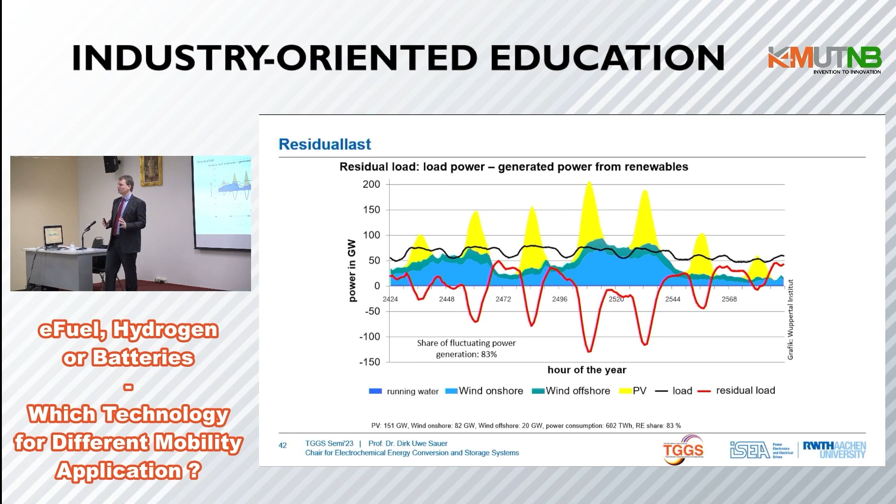In the past, we simply adapted power generation mainly from conventional power plants according to the load curve. So we always followed the load curve with our conventional power plants, because they have the energy storage included in the fuels. This is a really great thing about fossil fuels, they are perfect energy storage systems. No question about this.

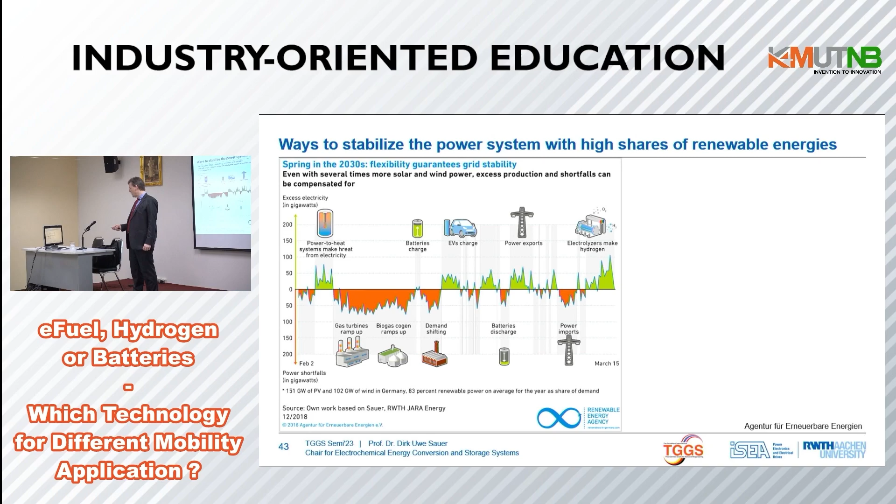And this means for grid stabilization, there are lots of different technologies, but among them, and this is why I want to point out, are for sure also electrolyzers, taking electricity from the grid, and depending on the technology, they can ramp up and down very fast. That's very important, so they can follow the load curve easily, and help to stabilize the grid on one hand, but also take the energy to convert it from electricity into chemical energy in terms of hydrogen.

And when we look at the demand in energy storage, we see there are different fields where energy storage is needed. We need short-term energy storage, which can balance in the range of seconds or up to a day.

We need energy storage, this is what we get from our calculations, which can serve the grid up to 3 weeks. We see that there could be periods in Central Europe with up to 3 weeks without sufficient wind and PV generation, due to very low winds and very low solar radiation in the winter times. And then we have to serve the system mainly from our long-term storage systems, and this will be gas. There is no other chance, no batteries can do this.

The problem is, if you have such an extended period of low wind and low PV, you will have it not only in Germany, or only in France, or only in Poland, you will have it all over Central Europe at a time. The first two weeks of last January were not a three-week period, but a two-week period which came very close to this. So there was no wind, and in winter anyway, we have almost no sun. So this was very, very crucial.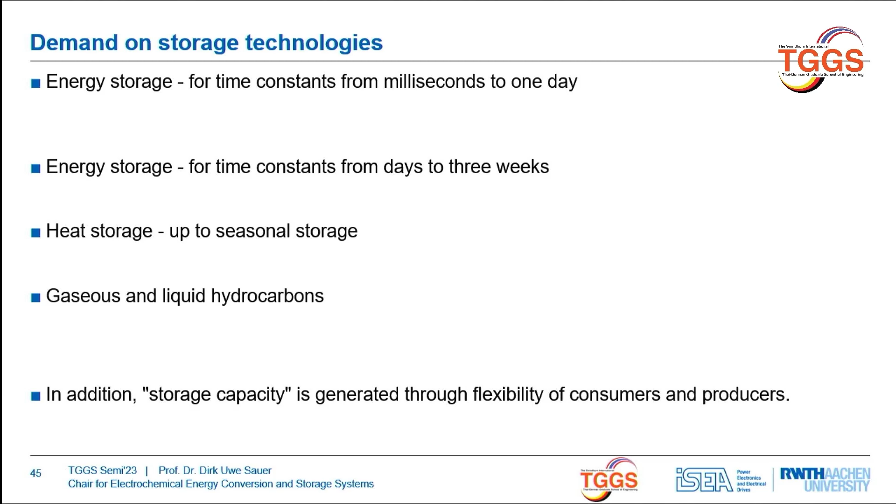Then we need heat storage, maybe even seasonal storage. We need gas and liquid hydrocarbon storage, and then we need, in addition, the flexibility - so ramping up and down the consumption in industry, in houses, in cars, and so on. Technologies we have available for this are batteries, flywheels, supercaps, pumped hydro storage, and so on. For the short term, we have gas storage.

For long-term systems, we have heat storage with water from low temperatures up to 100 degrees C, phase change materials, chemical storage, and here we have fuels based on hydrogen. And finally, the flexibility. So we have technologies for all of this. The main reason why they are not there yet is not because we do not have them.

It is because right now there's not a huge demand. Because even at 50% of renewables, we can still balance our grid relatively easily by ramping up and down the remaining fossil power plants. There are still a lot of people and politicians running around saying we cannot go further with the change of the energy system, that we should not install more wind and PV because we have no storage technologies.

It's totally wrong. The storage technologies will come if there is a demand, and the demand means if there's a market. At the moment, there is no market, not for large-scale storage systems, because it can be handled by the system. But as soon as it comes, you will see the storage technologies emerge, because the technologies are all developed. So we can go for this. This is not a showstopper.

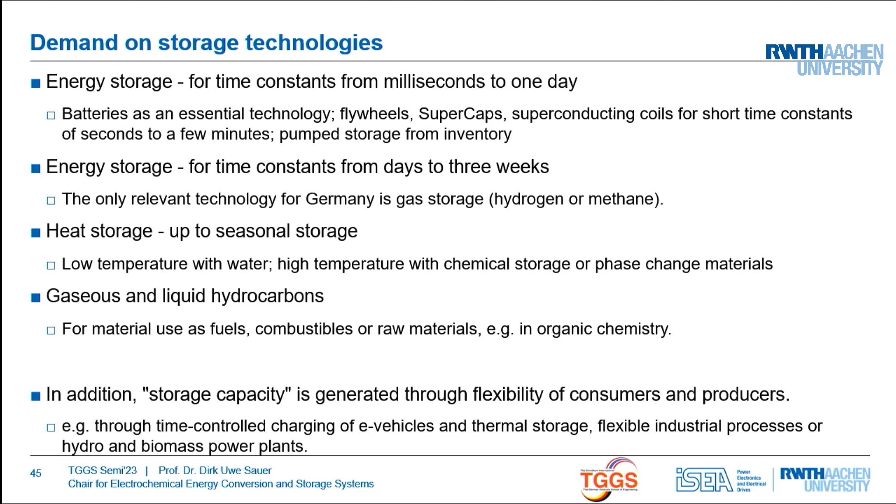Finally, I want to point out once again, because sometimes people try to make the change of the energy system somehow like a fight between those who say we should go more for an electricity-based system in the future and those who say we should go to a hydrogen-based system. Both is wrong. We need both. We need electricity and hydrogen, or better to say, we need electrons and we need molecules.

Simply because electricity is difficult to store, batteries are not really suitable in some mobility applications, as shown - airplanes, very large cargo ships. Fuel is needed in some industrial sectors anyway, and hydrocarbons are also needed as a raw material. Therefore, we need both, and both in huge quantities. But first of all, we won't get any renewable hydrogen if we don't increase the installed capacities in renewable power generation. No electricity, no electrolyzer operation, no hydrogen.

And here, the gas or other energy sources as long-term energy storage, with thermal power plants for electricity - this is what we have for the long-term supply. So both is necessary, and I think this is absolutely necessary to say. Every hydrogen we can produce in the coming probably 20 years will be urgently needed.

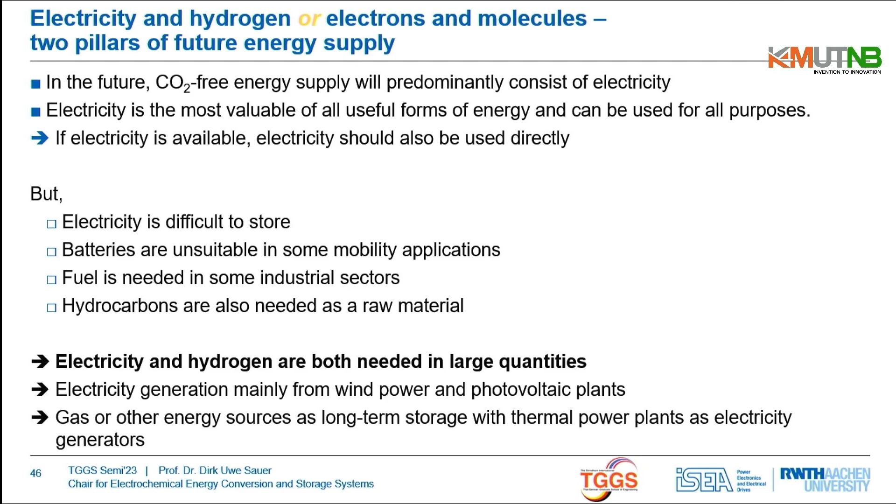Maybe beyond 2040, 2050, when there is so much surplus renewables and renewables are so cheap, maybe then hydrogen also becomes very cheap. But in the coming 20, 25 years, there will always be shortages of hydrogen, and therefore the costs are high anyway, but the price will be even higher, because if there's a shortage in the market, those who produce can take whatever they get.

This is something that has to be kept in mind - this is the background of all these discussions. It's difficult, because some people really see this as their political agenda, to go in one direction or the other. Only if we do both, and in the best combination, may we get on a good pathway. And this fits very well before we go for the first coffee break.

I mentioned already that we will not meet the 1.5 degrees centigrade target, and probably we will not meet the 2 degrees centigrade target worldwide.

So this means all the scenarios, also from the United Nations climate panels and so on, foresee that we not only have to reduce our fossil fuel consumption and therefore our CO2 emissions, but that we also have to go into negative emissions. Negative emissions simply means taking CO2, which is already in the atmosphere, and bringing it back under the earth.

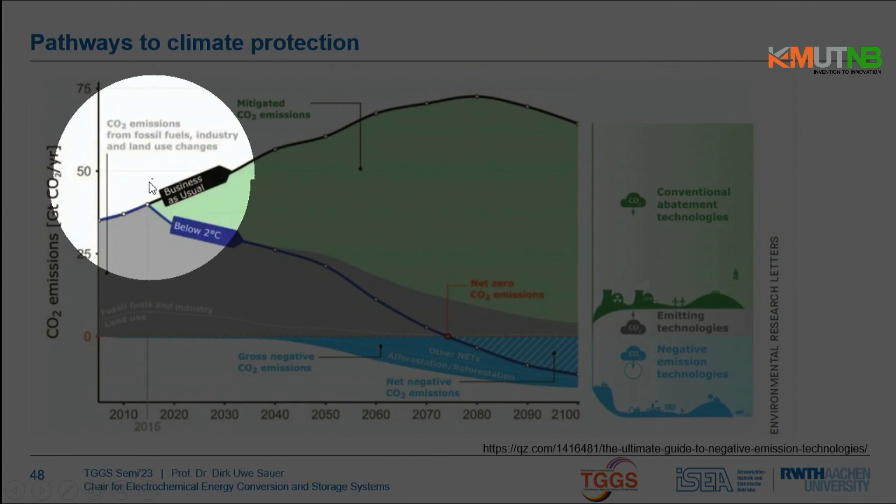And this is such a scenario. So the numbers themselves are not really of major importance in this diagram, but here you have the CO2 emissions per year. We're approaching here 35, 40 gigatons per year. And we probably will need—or if we would go for a business as usual scenario, so not doing anything, the emissions would increase more and more. If we want to stay below 2 degrees C, we have to follow this blue curve here. So this is where we have to get to.

And you can see at the beginning, it is still the most feasible way by reducing the use of fossil fuels, because we can increase efficiency, we can relatively easily change over passenger cars from oil to electricity and so on. But at a certain point of time, it will get more and more difficult to decarbonize different sectors, and therefore we can see that the expected emissions will stay above the curve which is acceptable for a 2 degree centigrade target. And this is the reason why, from a certain point onwards, these so-called negative emissions, shown here in blue, are necessary, because they are needed to compensate what is emitted more than acceptable.

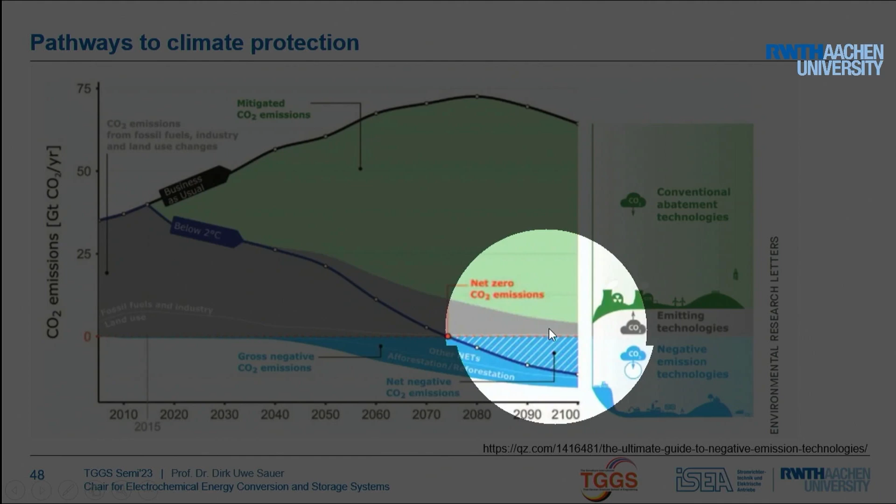For example, one of the big problems will still remain agriculture. Agriculture has lots of emissions, especially methane emissions, and this needs to be compensated. And then towards the end of this century, we have to do even significantly more than we still emit, because if we want, then we have at least a chance to maybe reduce the temperature to a 2 degree centigrade increase, or maybe even 1.5 by the end of the century.

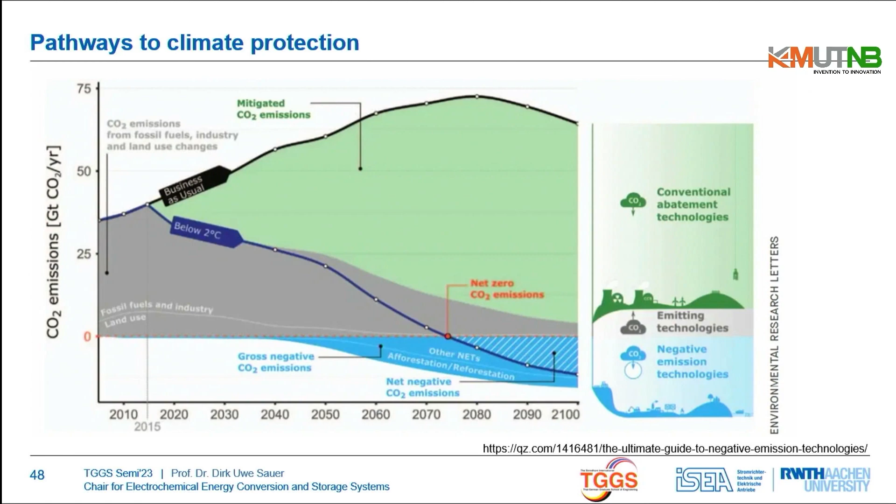And therefore, a lot of technologies are discussed. This is just the same diagram with different scenarios. So if we would be able to reduce the emissions very fast, then no negative emissions would be necessary. But this is totally unrealistic. And the later we are with the emission reductions, the more we have to go into these negative emissions.

And there are various technologies which are discussed for this. Afforestation and reforestation, so growing more trees, gives a certain impact. Bioenergy with carbon capture and storage—growing crops for bioenergy, then burning them, using the energy on the one hand, but taking the CO2 which is emitted in the burning process in high concentration, capturing it, and bringing it below the earth. So this is called BECCS.

Ocean fertilization: some people think it might be a good idea to put a lot of fertilizers into the oceans, and then the oceans will produce more biomass, and the biomass then captures more CO2. I'm extremely skeptical about these things. This is what we call something like geoengineering, because we today already have areas in the world's oceans where the oxygen content is extremely low, so low that animals and plants can hardly live there. And if we would even accelerate the growth of algae and others in the oceans, I'm not convinced.

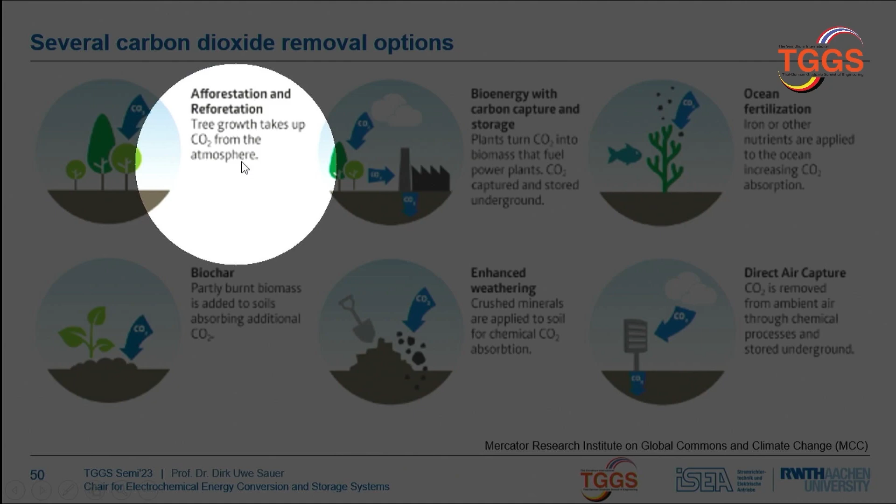Then we may do biochar. This means we put biomass into soils, and the soil can undergo chemical reactions and take some of the CO2 from the atmosphere. Same with enhanced weathering—crushing minerals which build compounds with CO2—or direct air capture. This means we are filtering the CO2 out of the atmosphere by technical means, and then we take it and, for example, press it into old oil and gas fields. These are probably the best things we have. We fill the CO2 back into the old oil and gas fields.

Some countries already see dollars in their eyes. Norway, for example, the largest producer of oil and gas in Europe, has been selling fossil fuels to everybody for decades, and probably will for a certain while longer, earning huge amounts of money. Norway is among the richest countries in the world. And now they are offering us their oil and gas fields to capture or store the CO2. So first they earn money selling the oil and gas, and then they earn money taking the CO2 back. But there are pilot projects starting, building pipelines now going the other direction.

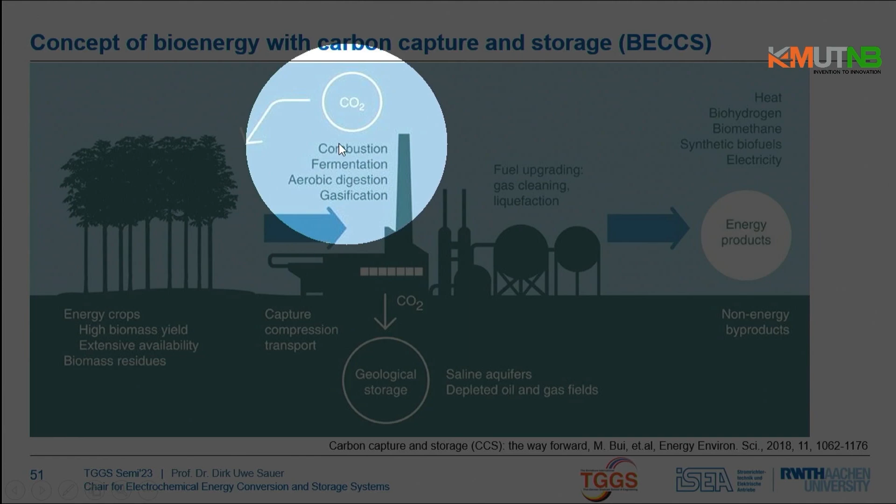Not gas and oil coming from the fields, but sending CO2 into these fields. We will see. BECCS is one of the technologies which might be important for capturing CO2. We use the plants themselves to capture the CO2, and then we make use of the energy, but we directly take the CO2 and bring it into the geological storage structures. That's one option.

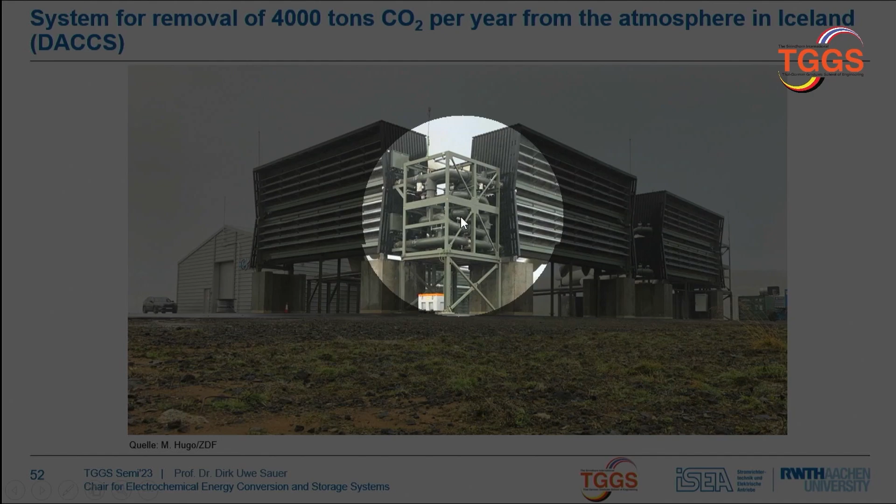The other one is these direct air capture systems. These are huge filters. This one is in Iceland, and this system can remove something like 4,000 tons of CO2. And you see, it's not small. So 4,000 tons of CO2 is the emissions of about 600 people in Germany per year. So this system would be sufficient to remove the emissions from today's 600 people. Not really a lot, and it costs a lot of energy and so on.

And these are just an explanation. Once again, BECCS: this is biomass, and the B stands for biomass, CCS stands for carbon capture and storage, and DACCS is direct air capture, carbon capture and storage.

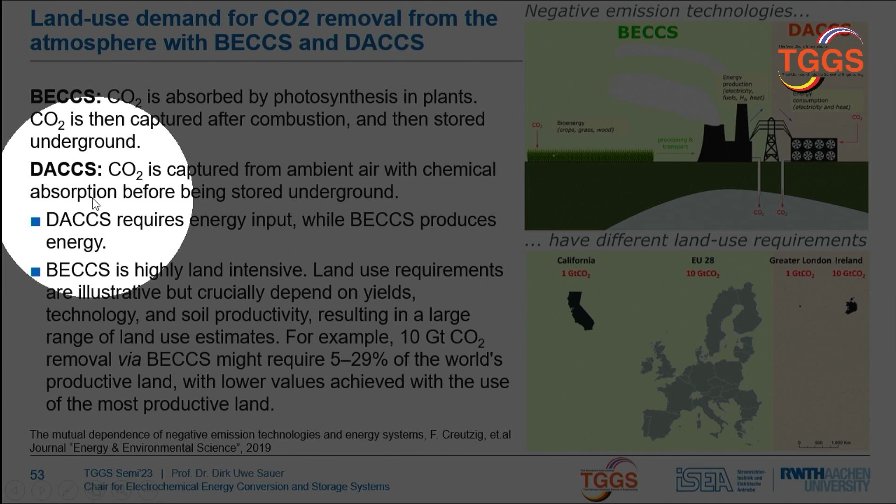The problem with the DACCS is simply technical, because even though the CO2 in the atmosphere makes a lot of trouble, its concentration is only 0.04%. So if you filter something with a concentration of 0.04%, you can believe this is not very efficient. And that's the big advantage of the BECCS, because you use the plants to collect the CO2 from this very low concentration in the air.

And then when you burn this, if you do it in oxy-fuel processes, with pure oxygen for example, you can have a very high CO2 concentration, which is much easier than trying to liquefy or concentrate it otherwise. Here, different technologies are listed, more for your records.

And the big question is, at the end of the day—and this is why there is now one slide missing—nevertheless, the big question is, where do we get with the cost of this? This is extremely important when we discuss the whole change in the energy system. There are people who say we will be able to operate these DACCS systems, the direct air capture storage systems, including storing the CO2 below the earth, at about 100 euros per ton.

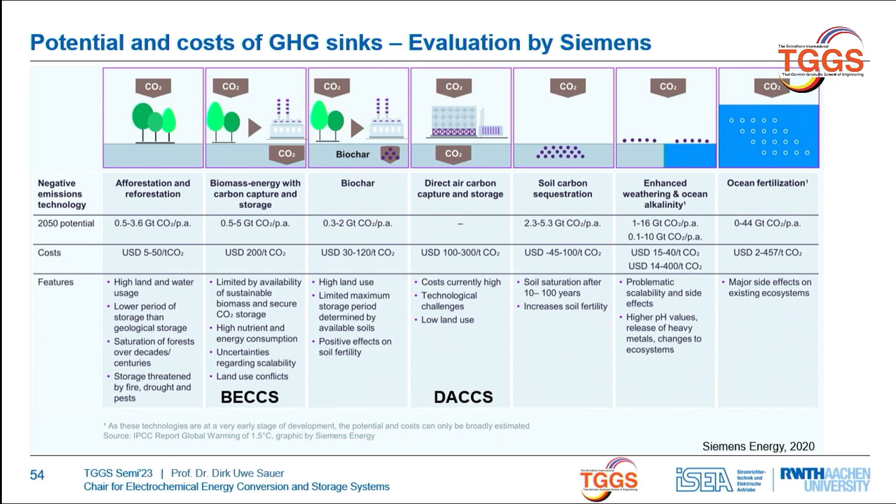But beside the price, we are also discussing how much capacity is there. Also there, the experts have a very wide range in their predictions of the available capacities for negative emissions. I just want to point this out—this is not really the main thinking now, but maybe it could change the thinking very soon.